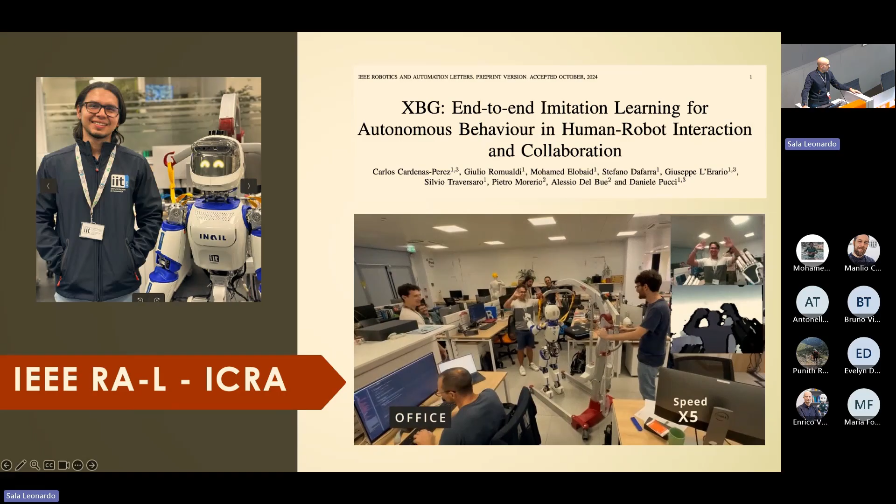So an update on publications. So I usually do this because what happens usually is that we know very well the literature on the other side of the world published by another university in, I don't know, Cuba, and we don't know what is going on behind the corner. So the paper by Carlos has been also accepted to ICRA. Carlos, I saw him around. Yeah. So congratulations, Carlos. Really nice results. So not only the Robotics and Automation Letters, which is a journal, the paper was also accepted to ICRA.

Then we got another acceptance to ICRA, which is Saverio, and I don't know where Saverio is. Yeah, Saverio is there. So Saverio, congratulations. It's been the output of the master thesis and a long work. Well done, Saverio. And then there is another update: the paper by Mohamed on online nonlinear MPC with stability guarantees has been accepted to RAL, so Robotics and Automation Letters.

This also was a really nice result, and it was really nice to see how the algorithms could work not only on the ErgoCub, but also on the quadrupeds by the DLS research unit led by Claudio Semini, in a tight collaboration with Giulio Turrisi, that I also wanted to thank, and that's basically the outcome of the paper. So congratulations, Mohamed and Giulio, for these really nice collaborations that I really encourage.

So I really encourage bottom-up collaborations across research lines, research units. Do not hesitate to stop other guys and understand what they're doing. So if there is any space for collaborations, historically we've always been open, and we will keep being like that. So a few messages.

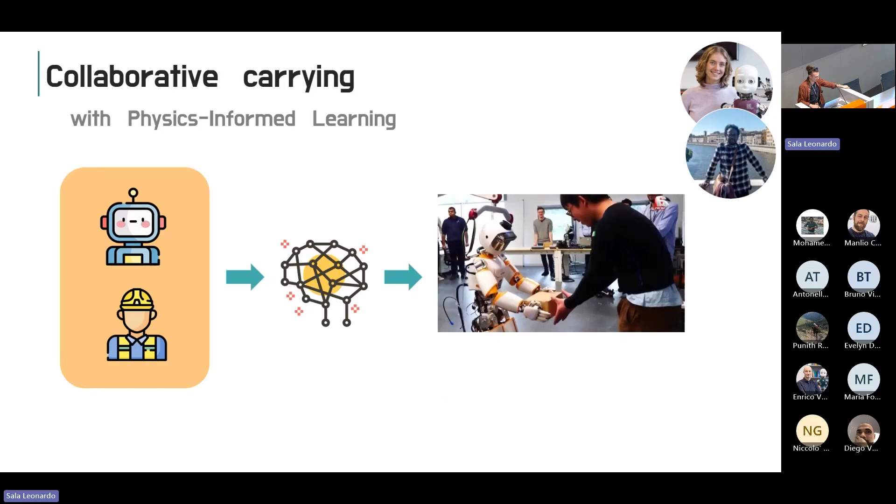Also going to a different behavioral synthesis approach, we have the work that Carlos has done, that is XBG, end-to-end imitation learning for autonomous behavior in human-robot interaction. This paper has been accepted. So the idea was to substitute the LSTM as a temporal component with a transformer encoder, a transformer network. So the idea is to let the transformer capture sequences and correlations that are also far in time. This work has been carried out with the guys from Pavis, and we already have some results.

Okay, so this is a preliminary deploy of the network. So yeah, this is an ongoing activity. XBG needs to be increased. So we have two streamlines, let's say. In one case is to make the architecture robust, and we can do this with more structured data, so feeding to the network the skeleton and the end effector pose. This is a work that Ariana is doing with Carlos, and also extended robot behaviors. This is another activity that just took off, that is to use cross-embodiment, for example via vision-language models, and to get data from the internet, so adapt them to the iRonCub model.

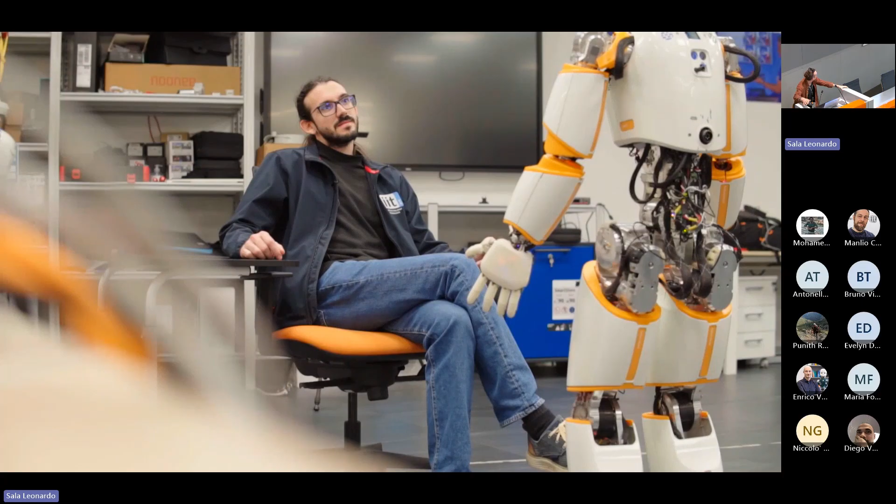So when you talk with it, we can see from here, for example, we have this nice video that is recorded. John is talking with the robot. The speech is translated and then passed through the LLM, and the LLM is able to generate the favorite action, let's say, and also some visual response. So in this case, we enable more channels, more than the motion one, we can enable also the speaking one, let's say.

Okay. We switch to some different topic. This is the data-driven method for design, so we can say co-design. This is exactly what Filippo has done. So the idea is to learn how to accomplish a task and evolve the model accordingly. So we can add to the classical reinforcement learning loop, in which we have an action, the reward, and so on, another external loop in which there is another optimizer. So we have the model that is fed to the simulator and evolves according to the task. For doing this, what we need is a fast simulator, and if it is differentiable, it's even better, so we can use optimizers to get the parameters. But this is the topic of the presentation that Carlotta will have later. So stay tuned.

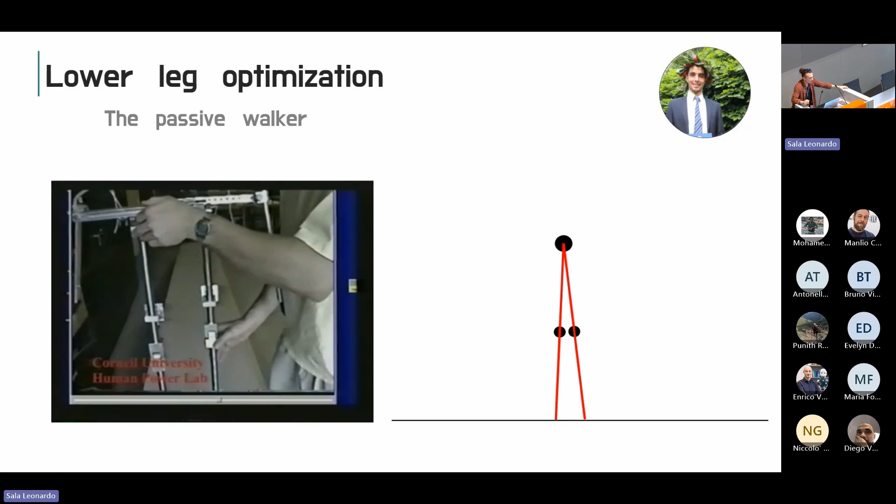Punith is addressing this problem, but with a slightly different approach. So he's starting from the CAD. So the idea is to use directly some software that generates models and takes into account structural analysis, and generates then models, for example, the URDF, to pass them to a simulator. So the classical co-design loop.

In the previous work that Punith has done, he optimized the interfaces with the jets, so the structure that holds the jets. And now he is extending the optimization to other pieces, in particular to the interfaces with the external forces, so jets and contacts, so also feet. And he also wants to optimize height and weight of the robot, for example, moving the central mass, moving the masses inside the limbs.

How to do that? He's using two main tools. The assembly parametrization and the structural analysis is done using SolidWorks and Creo, while the topology optimization, so also the modification of the structure of the link, not only the inertia and the mass, is done using Rhino and Grasshopper.

How can we do the task evaluation? We came up with this idea. Since the main idea is to also optimize the robot for multimodal tasks, so aerial and legged locomotion, we can feed and evaluate the model in a reinforcement learning loop in which the robot can walk and fly. So we can optimize for two main objectives.

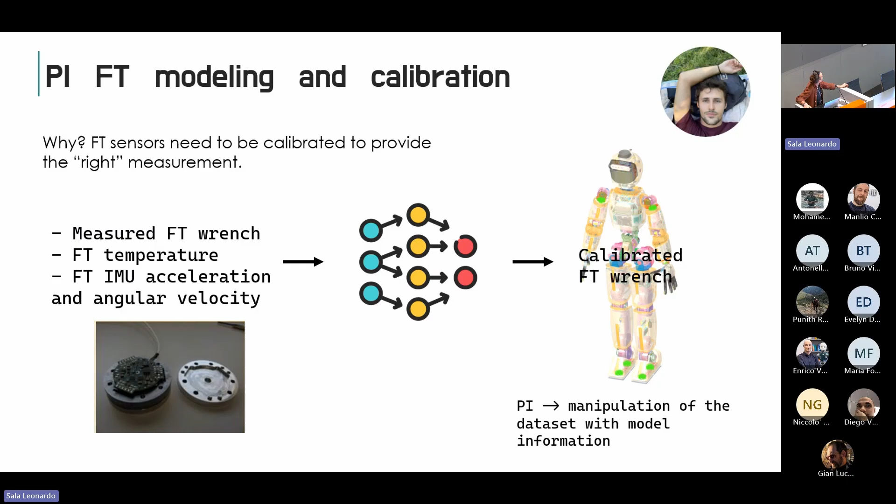Regarding models, we have also the work that Filippo is doing on FT modeling and calibration. Why do we need calibration for FT sensors? The raw measurement of FT somehow needs to be transformed, so we need the right measurements. The idea is to take measured FT readings that are not correct, along with FT temperature and FT acceleration, feed them to a model and obtain the calibration. The physics-informed information is in the use of the model.

There are some results that are pretty promising. In this video, you can see that Phil is compensating, somehow the controller compensates for the motion. With no second calibration, the movement is not really good, there is some damping. While with the second calibration, we can see that the movement keeps the energy.

But then also a monster came out, so we have the temperature effect. We see Danny with a strange tool heating up the robot. And from the data, what Filippo discovered is that we have hysteresis.

On the left, we can see that with no second calibration, these are the raw data, we have hysteresis. Feeding the temperature into the model, doing a training with the model, this hysteresis is mitigated, let's say. Along with this, Phil is also investigating the use of LSTM.

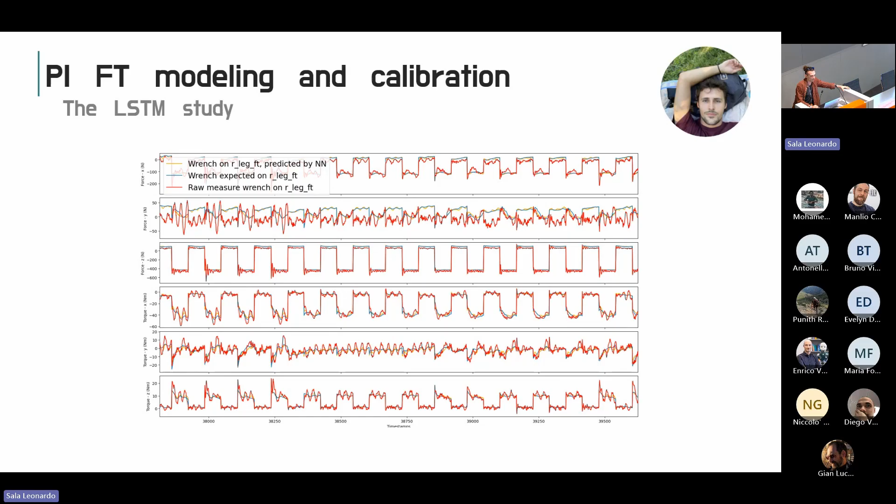The LSTM should capture some possible dynamic effect in the FT. Before it was instantaneous; right now with the LSTM, we can give some dynamics. Filippo also found out that there is a slight improvement with respect to the multi-layer perceptron.

We arrived almost at the end. There is now the reinforcement learning, there is MPC for iRonCub. You may wonder if this is connected to learning - no, but Davide will soon start to work on topics related to reinforcement learning, and there will be a presentation later. And finally, this is the work that Giulio and I are doing.

This is reinforcement learning with adversarial motion priors. The idea is to exploit imitation learning, take some motions from motion capture of humans walking, scale them to the robot, and create a reward that forces the policy to follow these robot movements.

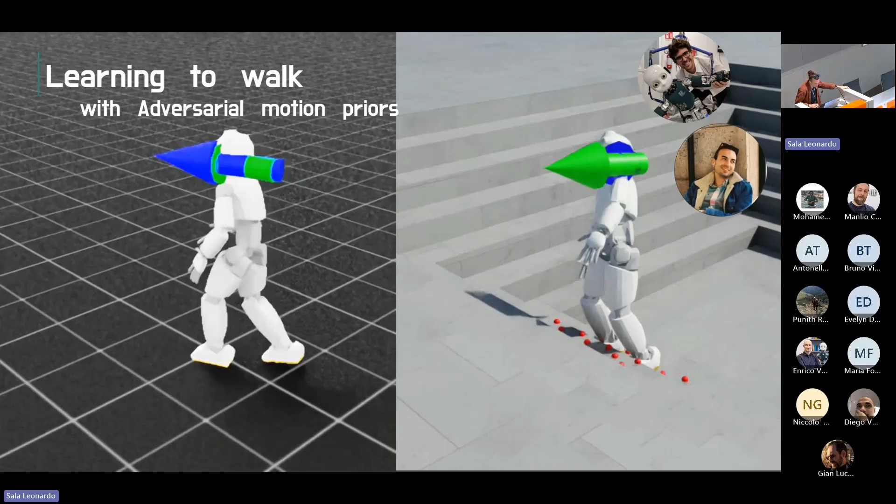The simulations are okay, and we need to move to the real robot. So what is needed? We have joints with friction, so we need a policy that exploits the friction during training. For this we also use heavy domain randomization, and maybe more - randomizing things like the terrain, and maybe more information in the observations we give to the policy.

But we did some first experiments, and it does something. This is the fancy video. We have also another video that I prefer because it's funnier. As Giulio said, we might have broken some FTs.

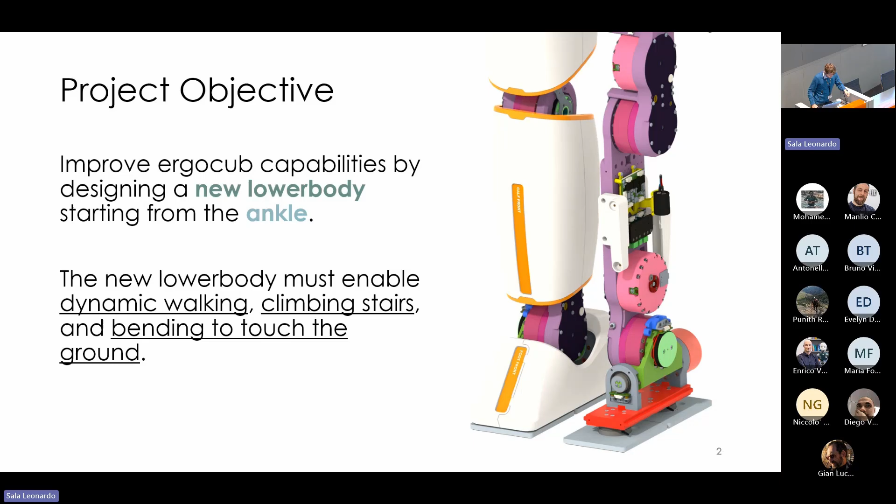After some iteration, what we would like to do is achieve a behavior like this. So for sure we need to improve the hardware and then also the control.

In order to do this, what we started doing 3 months ago was to create a new team that groups some AMI members and iCub Tech members, combining research and the expertise of iCub Tech.

We started 3 months ago and did a bit of planning. We prepared 6 milestones and managed to complete 4 out of 6. But before going through all of these, let's just have a quick recap.

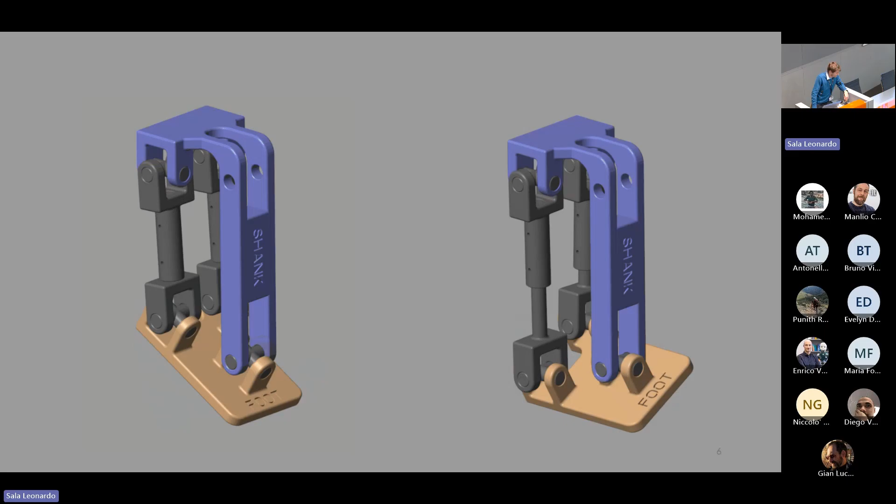We want to design a new ankle mechanism, and we decided to create a mechanism with a closed kinematic chain and linear actuators. We have these 2 linear actuators: when they move simultaneously, we actuate the pitch, while when they move in opposite directions, we control the roll.

Now let's move to the milestones. The first one was to create a digital thread in order to implement a model-based systems engineering pipeline that will allow us to track how the process evolves in this approach. The first thing to do in order to implement this pipeline is to identify the requirements.

To identify the requirements, we spoke with the stakeholders and defined some tasks we would like to do with this robot. We performed simulation and experiments with the real robot to identify the joint requirements. With these, we developed a mathematical model of the mechanism, which allowed us to convert the joint requirements into actuator requirements. These requirements are fundamental for choosing and designing an actuator, and we used them to create the model engineering and digital thread to track the system requirements, integrating them in the MATLAB environment. This is the milestone we completed.

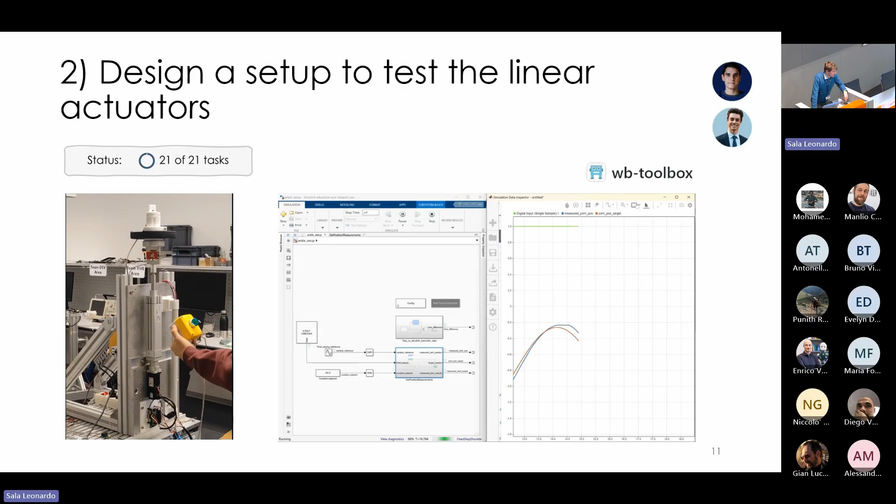Another task was to identify the main components to create the first ankle mechanism. Given the constraints we found before, we started a literature review, and after a lot of meetings with suppliers, we identified the Wittenstein actuator, which we are going to use to create the first mechanism.

Basically it's a linear actuator with brushless motors connected to ball screws that convert rotation into linear motion. This actuator already integrates an incremental encoder, and we chose to use it because this way we can control it without changing too much of the firmware. At the same time, these actuators enable us to satisfy most of our requirements, except for the most dynamical ones, like jumping and fast walking.

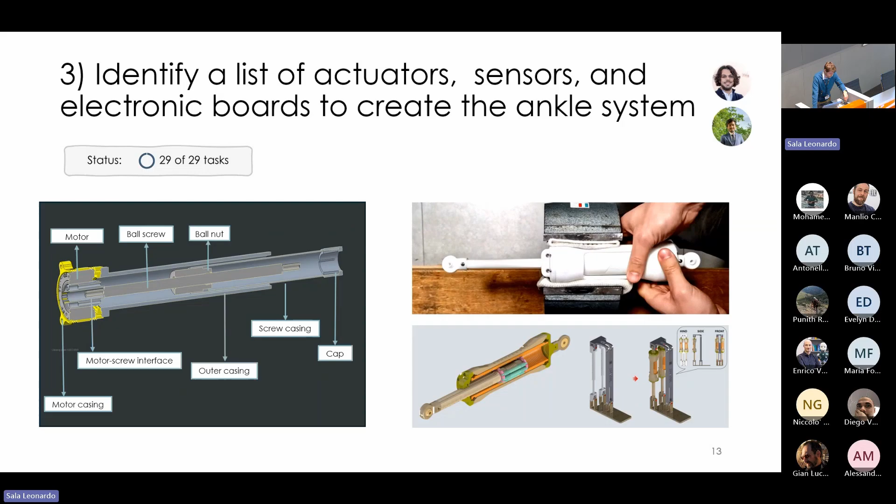So we started investigating the possibility of designing a custom actuator with ball screws, but also with roller inverted screws. At the same time, we began another investigation evaluating the possibility of creating a mechanism with a different kinematic structure, maybe without linear actuators. For example, the mechanism you see in the video is from the Unitree robot, which has a revolute motor, and here we're also evaluating creating a custom actuator with a planetary reducer.

Another activity was creating a simulation of the low-level controller to track the desired joint position. We wanted a control law that lets us track the foot orientation while controlling the actuator. So we created a SimScape model of the ankle, ported it into the System Composer pipeline, and verified that the simulation results are comparable with the mathematical model we developed before. And yes, they are.

And so the next step in order to conclude this activity is to design this controller. Then another activity that we did was to perform a simulation of ergoCub walking with the new ankle.

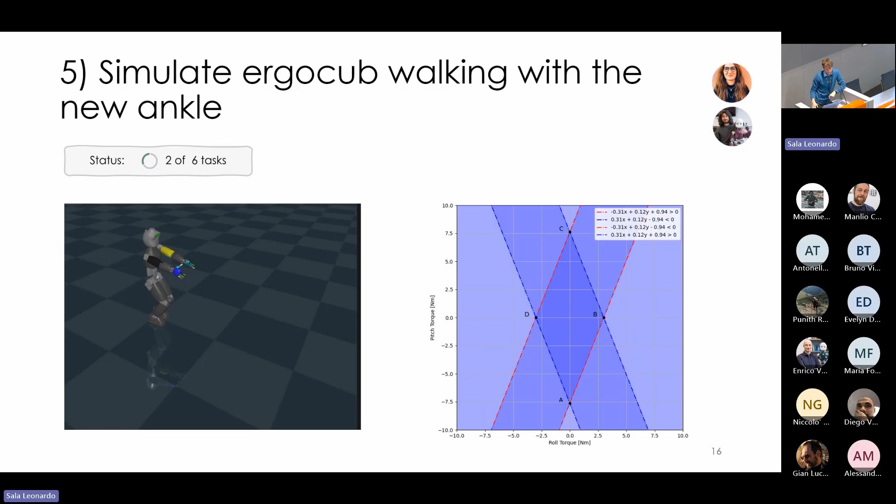And then at the same time, in order to simulate and test the new ankle, what Roberto did was to understand how the force limits of the actuator translate into torque limits, and now what we wanted to do is integrate this relationship into the constraints such that the controller can provide a force that satisfies the requirements, the limits.

Then the last milestone that we set was to create a framework in order to optimize the linkage parameters and the actuator selection here. So the goal was to understand which is the best mechanism in order to perform the task that we have identified before.

So basically we parameterized the mechanism, and then we formulated an optimization problem with Grasshopper and Tunny, and the outcome is a Pareto front where in our case the objectives were to minimize the force and the velocity, which are two opposite objectives. Now what we are doing is identifying which is the best mechanism for our use case.

But then, since we started to investigate also the revolute motor, we ported the same framework to the revolute, and in this case we are also investigating the possibility of considering collisions between motors. As you can see in the figure, all the solutions with red points are not feasible.

Okay, this concludes the milestone. Let's quickly go to statistics.

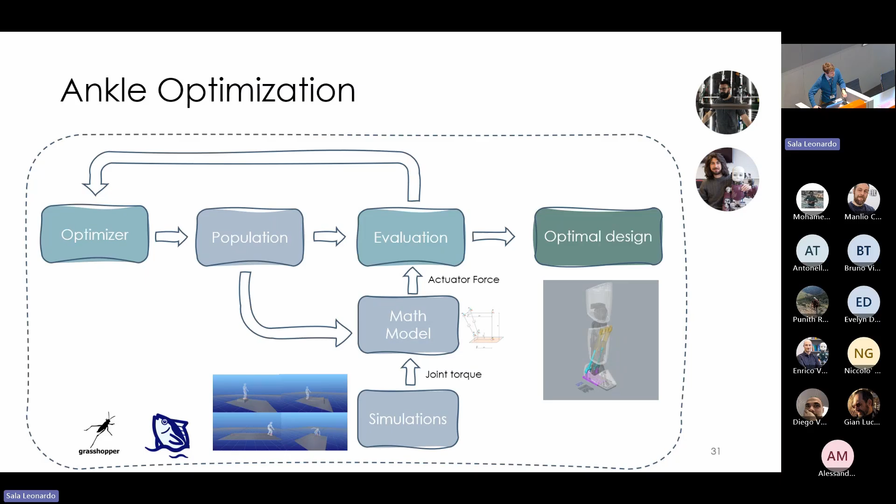Here, the thing is that we are assuming the design is not influencing the simulation, but is just influencing the conversion between torque and force. This is different from the approach that Punith is doing, because in his case the population is influencing the simulation and also the controller, so the pipeline is a bit different.

While another approach that Shabarish is doing is basically here there is not an optimizer, there is Shabarish, the mechanical engineer, who is defining the population, also because here the design space was smaller. And so he created the population.

Then with simulation, we evaluated some possible solutions in order to understand which motions are fundamental to create thrust vectoring, and then we obtained the final design. And then a different approach has been used for a different problem by Guglielmo.

Basically here we wanted to understand which was the correct mathematical model of the inverted roller screw. So what we did was start manufacturing stuff, and we did some physical testing.

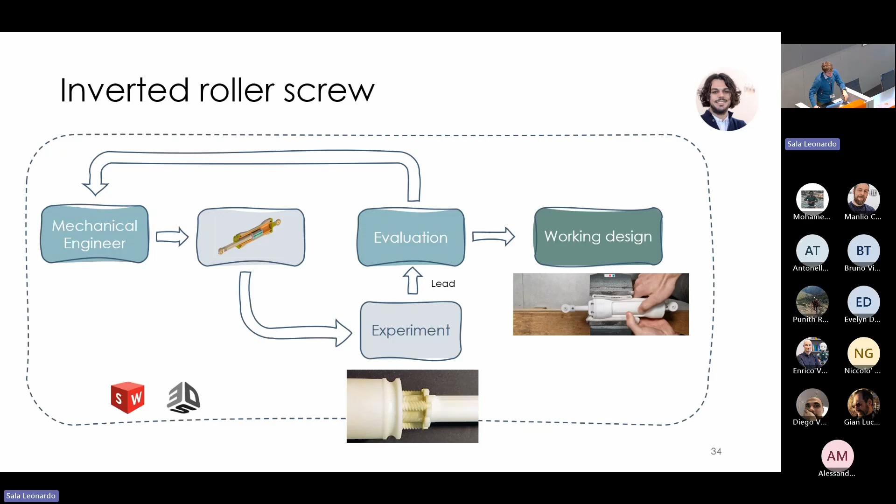Then with physical testing and a lot of analysis of YouTube videos, we understood that there were some problems, and then with some iteration we managed to obtain a final working design.

And then just one word about other activities we are doing in this team, which are basically what Giuseppe also said before. We are also studying simulation, and these are the fundamental data in order to create this pipeline that we have seen before. And that's all.

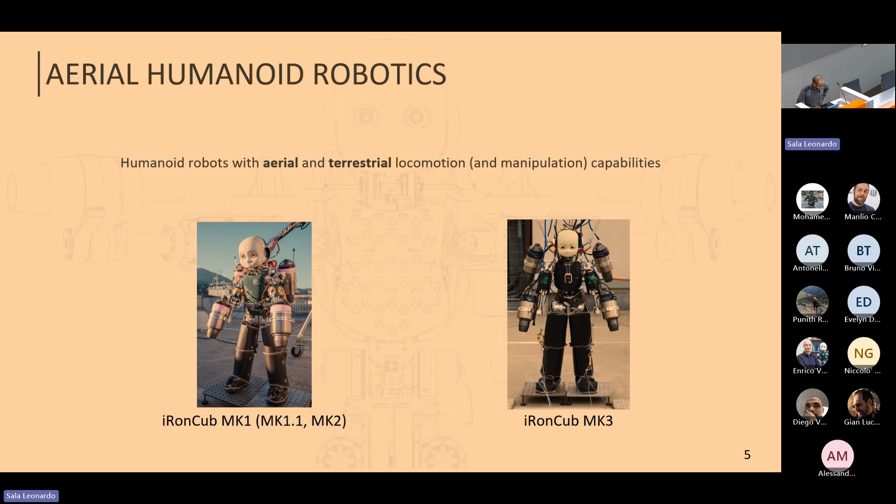The questions we are trying to solve in the iRonCub project are how a humanoid robot can benefit from multimodal locomotion, and what design and control challenges we face when we equip a humanoid robot with jet engines for multimodal locomotion.

The developers team currently consists of 10 members. Antonello went for a period abroad at Stanford. And I'd like to give a special thanks to Gabri, because he has been around for many, many years, leading the iRonCub team and giving us tremendous support. So thank you very much, Gabri, for being an amazing Scrum Master.

No, yes, thank you. It's not like goodbye.

Yeah, so the team activities are ranging from experimentation with the robot, with the jet engines, and trying to find models and simulation. And then it ranges from aerodynamics, hardware design and co-design, and also planning and control.

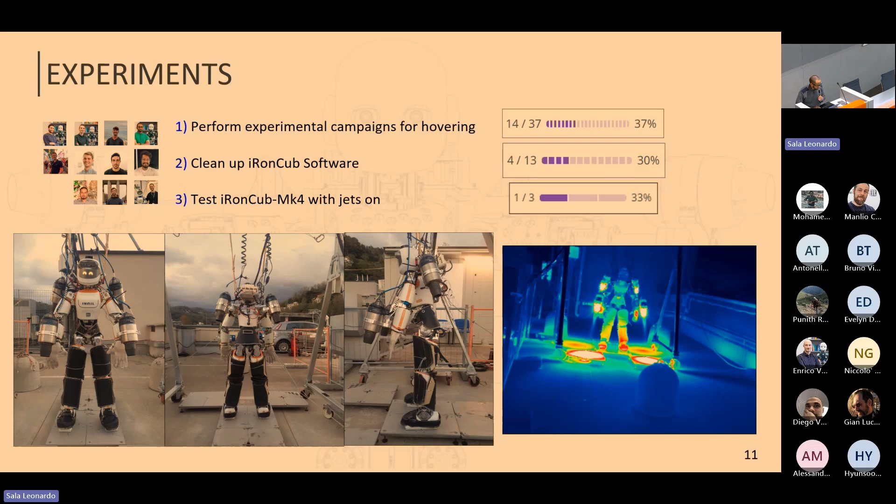Our experiments: in this iteration, we have conducted 7 iRonCub experiments given the time and weather constraints, and also 2 test bench experiments.

Then let's talk about the base and jet estimation activity. Mainly we are focusing on the jet engine models for estimating the thrust, as we found that it requires some attention because the thrust usually depends on the weather conditions. So if we perform an experiment in the summer and in the winter, we get different responses. So we had to have another iteration on the models.

The base estimation algorithm is a task that is taken over by Alessandro. And for the improvement, we wanted to have some ground truth. That's why we started working on using the setup that we have in the lab for giving the actual position to compare with our setup. The force torque sensor activities are more or less on hold this iteration because we are focusing mainly on the jet engine models.

There is another interesting activity by Alessandro, that is, we were trying to reduce the sim-to-real gap. So Alessandro was injecting the noise that we have on the sensors into the simulation, and then Davide was testing with the controller. So in this way, we are closer to the real scenario, and we are identifying behavior closer to the real robot.

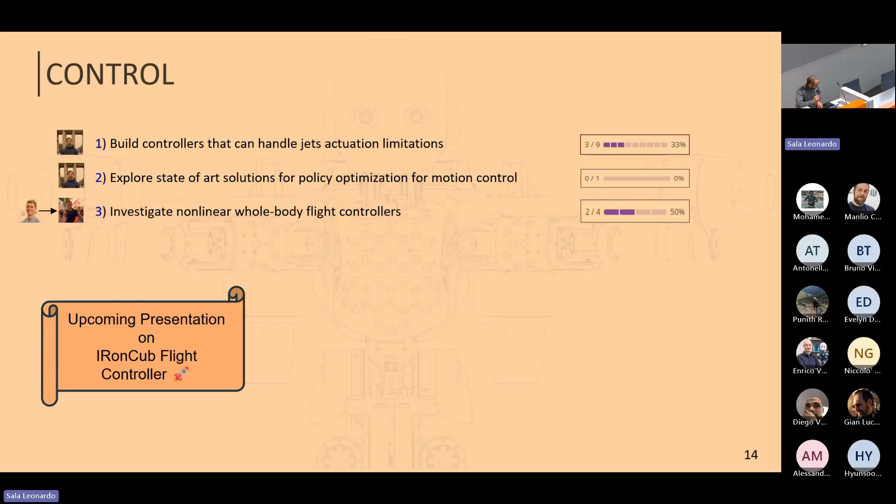About the control, Davide is conducting his PhD, and he is basically coming up with a new control architecture that he's going to present in the next presentation. So stay tuned. Okay, I'll try to be fast.

Then there is Niccolò, who is conducting the nonlinear control activity that has been taken over after Fabio Bergonti was working on it. And he managed to build the Python bindings for testing in Python. I'll try to be fast. Saverio's activity was mentioned before for his master thesis work. At the moment, he's involved with the joint lab, so he rarely has time to work with us.

Hardware design is the activity of Shabarish. Thank you Fabio for highlighting it. Basically, he's working on the thrust vectoring, and he came up with a conceptual design. So we are moving towards realizing this design on the real robot, and he's preparing also a publication for the thrust vectoring activity.

The activity of Punith, thank you Giuseppe for highlighting it. It's really nice that everyone explained the work before. So Punith, as Giuseppe was saying, is expanding the parameterization that he did in the past for the whole robot. So he's considering more joints.

And another activity that I wanted to highlight is that he has been working with the MuJoCo simulator. He ported the iRonCub controller into MuJoCo to be able to test his pipeline, but for now his focus is back on the reinforcement learning environment that Giuseppe developed, because it would give more promising results.

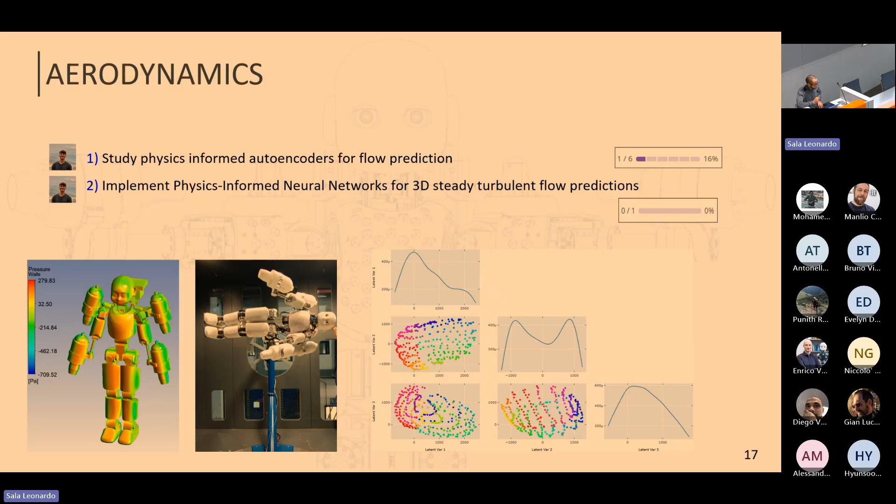The activity of Anto, thank you Giuseppe for explaining it before. You made my job very easy. Basically, he's exploring more physics-informed neural network models for his aerodynamic modeling.

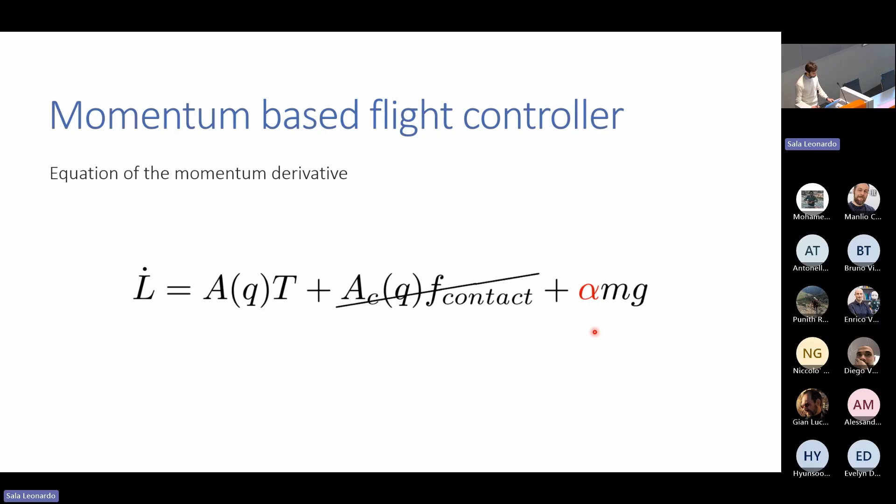So at the end, the equation rewrites like this. We write it in body because in doing that, the A matrix depends only on the joint position. But here the problem is that this equation is nonlinear in joint position and thrust, as you can see. So what we decided to do is take this term and linearize it around the current joint position and thrust.

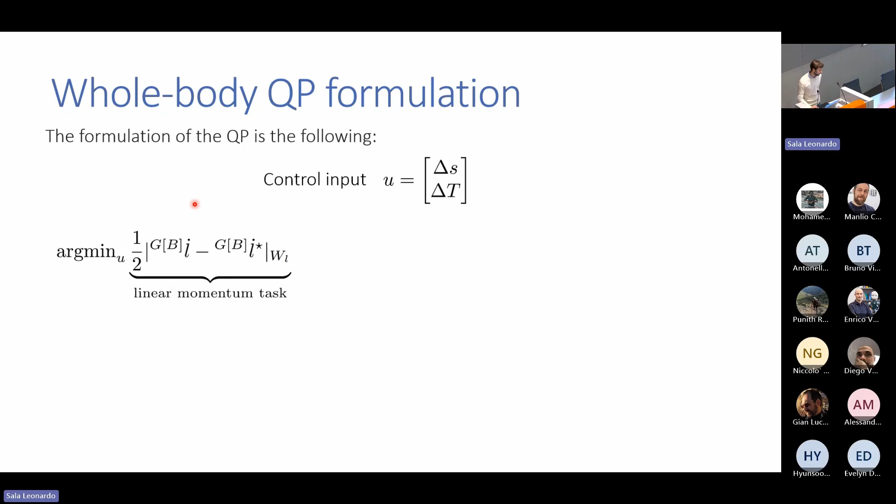So the first controller that we came up with is an instantaneous whole-body controller that runs at 1 kHz and computes the desired thrust and the desired joint position. This is the formulation of the QP, so we chose as control input the variation of joint position and thrust. And then in the cost function, we have the linear momentum task, which basically is needed for controlling the position of the robot. The angular momentum task, which is needed for the orientation of the robot.

And then we have a postural task to keep the control input as low as possible. And then this is subject to the following constraints on the maximum variation of joint position and thrust, and maximum and minimum thrust and joint position.

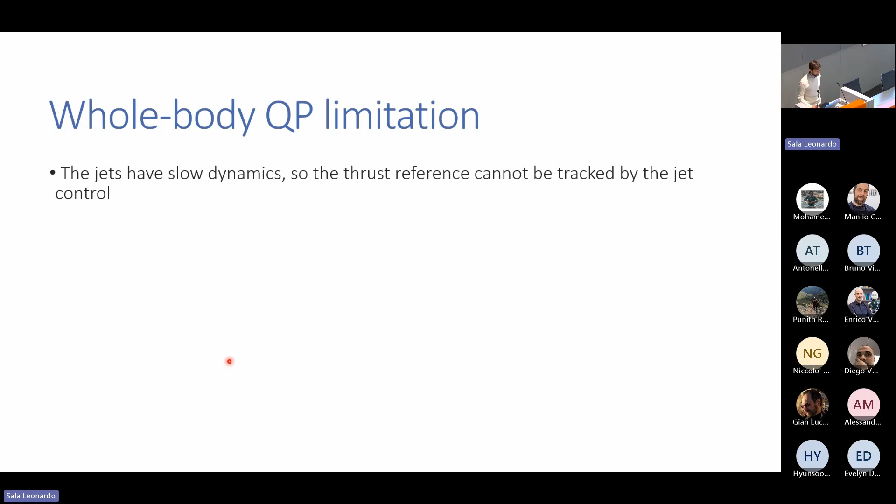This linear MPC runs at 10 Hz because it's the same frequency the jets run at. If we ran faster, all the throttle commands would be lost and not actuated. The main peculiarity of this MPC is that it computes directly a throttle reference for the jet, and not a thrust reference. The MPC also gives a joint position reference for the instantaneous controller, which in this case computes only the joint positions to be set to the robot.

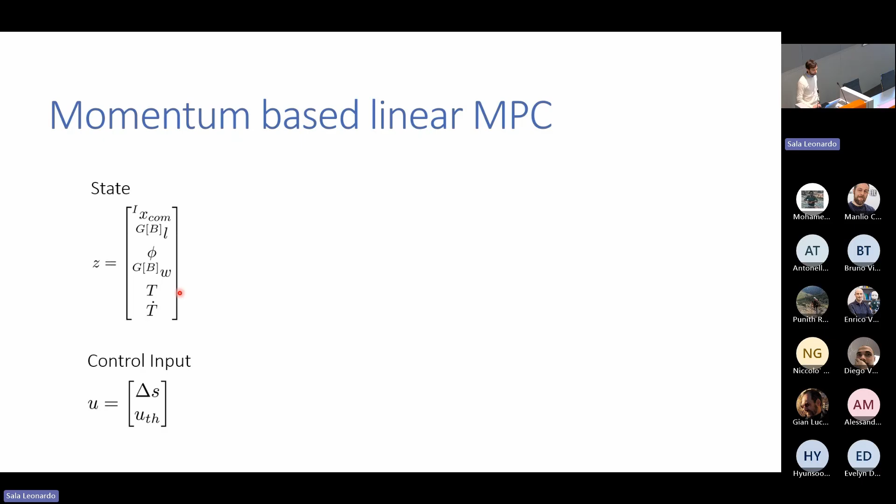So here is how we decided to implement the MPC. In the state, we have the position of the center of mass, the linear momentum, the roll pitch yaw of the base, the angular momentum, thrust and thrust derivative, while our control inputs are the variation of joint position and throttle. And as you can see now, the thrust became a state and no longer a control input.

And here is how we selected the cost of this MPC. First we have the cost related to the tracking of the reference state. Then we also have a postural task to keep the control input as low as possible. As constraints, we have the usual propagation of the dynamics of the states, and some constraints on the control input.

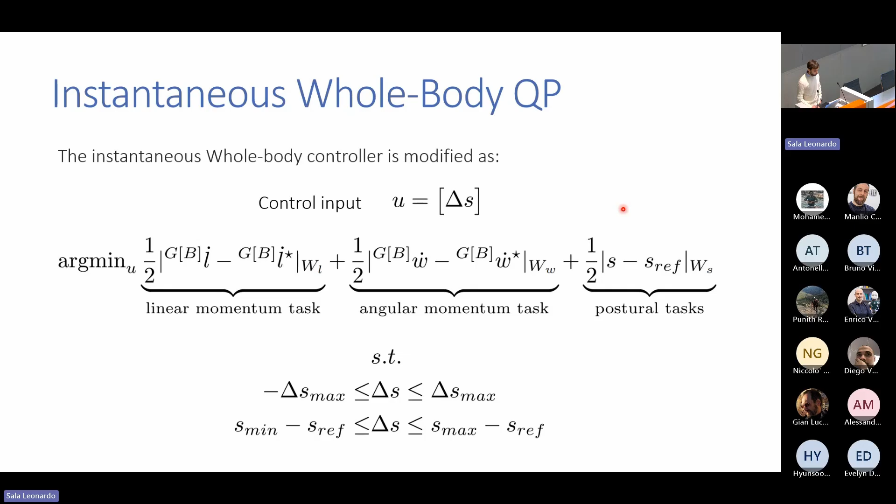3 minutes left. Sorry. What?

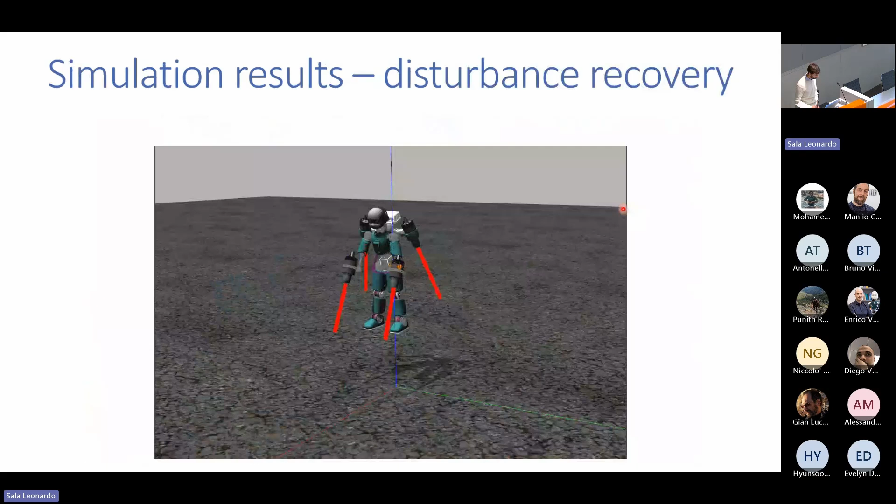The current limitation we found is basically the sim to real gap. We can sum up the limitations in this one, but in detail, the jet model that the MPC uses strongly depends on the air conditions, and this is not very easy to model. Then in the MPC, the state of the thrust and thrust derivative is not updated with the estimated thrust, but with the prediction of the MPC at the previous time step.

And then we found out that there are some delays in the communication with the turbine. When we actuate the throttle, it takes almost half a second to be properly set in the jets. We are working on future improvements. The first one is to improve the simulation and maybe add some disturbance in the jet forces in Gazebo.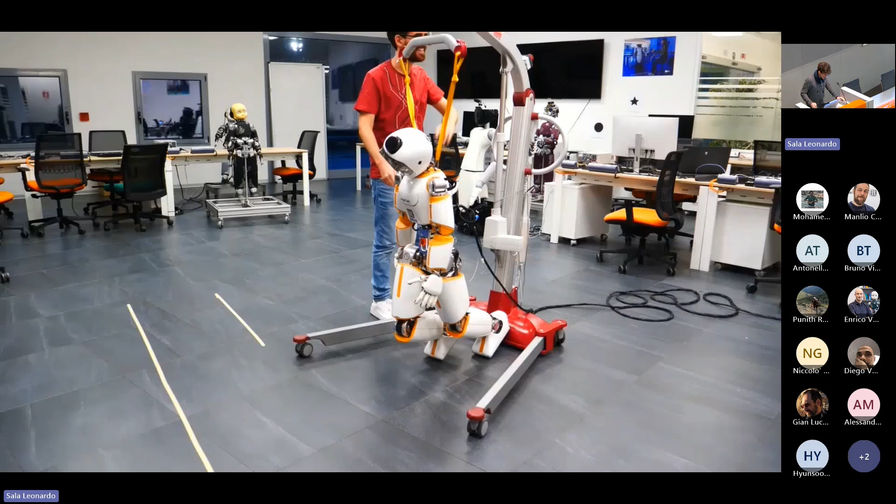And so to solve this problem, we have the wearables, for which the iFeel and the human team are the main responsible, and then the robot that we already have, the ErgoCub robot, for which the Delta team is the main responsible. So where we are now, we have the classical view that I show you. I had some other clips where we have the robot walking, and it's not so robust, even if we are able to show some demos here and there. So this is actually where we are today.

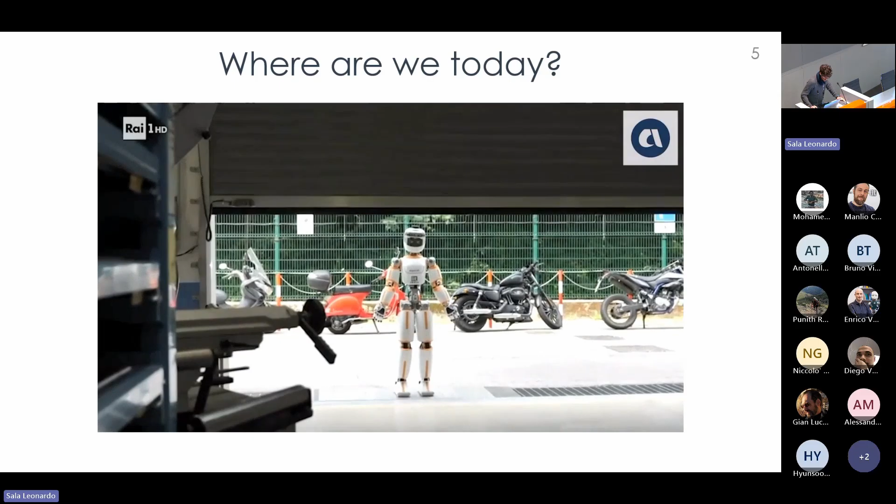So today we have a robot that is able to walk in position control, and this is actually a limitation of our control infrastructure. The fact that it's in position control makes complex the interaction with the environment and the humans, for instance. So our goal, our moonshot, is having something like this. Fabio already showed this video. This is the Unitree robot.

So you may think, okay, but this robot is completely different from ErgoCub. ErgoCub is taller, and the weight of this robot is less. That's true. But in the meantime, there is also the Tesla Optimus robot that is similar to ours for the size and for the weight, but is able to do crazy stuff, at least for us, like walking on uneven and rough terrains and able to recover. So our goal is to have something like this.

So the Delta team mission is to design a robust, reactive, and dynamic architecture for locomotion and human-robot interaction. This is the classical slide that I copy from one research increment to the other. We have several actors. Some of them are in other teams, some are mainly working on the team: Giovanni, Roberto, Evelyn, Carlos, Lorenzo, Mohamed, Ines, Filippo, Guglielmo, and me.

So let's go to the team objectives. We have several team objectives. The first one was to have a momentum-based balancing controller up and running on ErgoCub, working with the UKF and the friction compensation that Ines developed during her PhD. This objective has been completed, and this is the video.

This is one of the videos that Ines will present at her PhD defense, where we have two ErgoCubs working with the same controller, and the low level is different from the one we used to have, that is the whole-body dynamics, but is a UKF filter that considers also the current measurement.

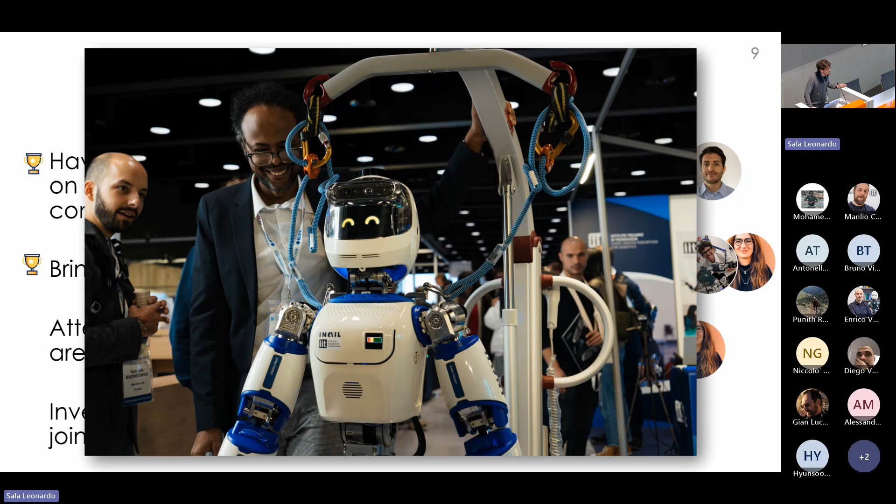There was another task to make the robot walk where the joints are controlling velocity. This activity is slowly starting, a collaboration between tech and us with Carlotta and me, where we moved our analysis from the robot to the test bench they have, since we found some modifications that had to be done in the firmware. So testing it on the test bench was easier.

Another important task was to investigate possible solutions for modeling motors plus gearbox. This is a step towards having better torque control. This activity is ongoing, and with the help of Giuseppe and Fabio, we decided on a list of possible experiments we can do with that, hopefully once the test bench arrives at a certain point.

Okay, then there were some more personal objectives. For the low level, Ines was able to implement UKF for floating base on ErgoCub. I'm not going to show the video again since I showed it before.

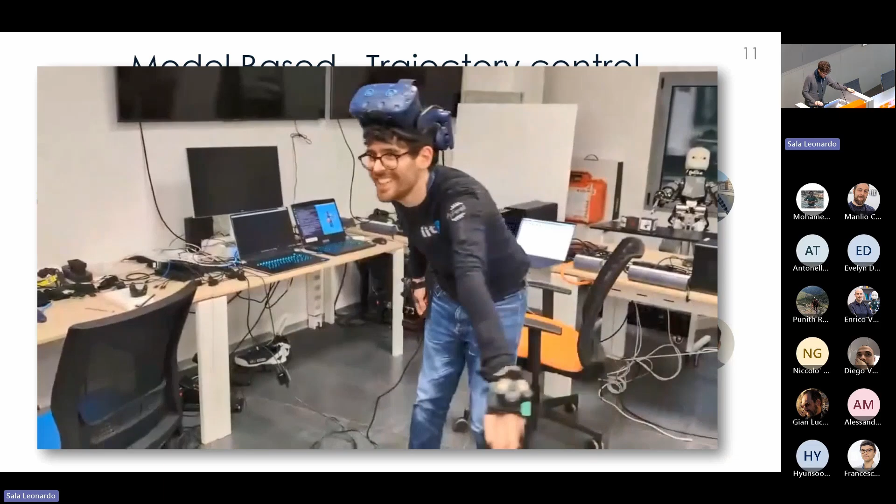Tranquillo. So there is the video where I'm trying to collect some data to analyze the reachability space of the current ErgoCub. There are for sure more proper ways to analyze the reachability space, but this one was the fastest in order to give fast results to the iCub tech team.

And then there was the work of Lorenzo. I won't talk a lot about this because Lorenzo will do the vertical presentation after me, but he was able to port the momentum base. That is actually the video that I showed you before.

So for the high-level controller, Lorenzo was mainly in charge of the task, while for the connection, low-level, and identification, it was Ines.

Okay, regarding data-driven approaches, there was reinforcement learning. The task was trying to port MPRL onto ErgoCub. We did some experiments on the robot.

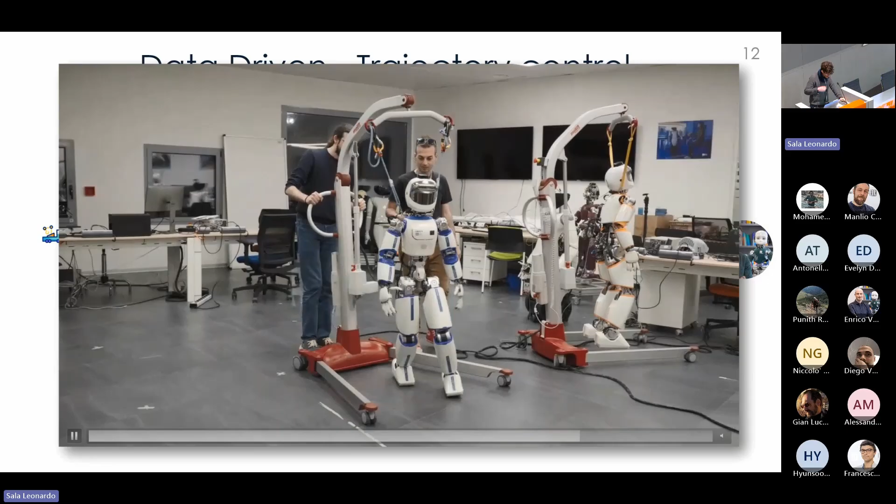It's not working fine, as you can see, but at least it's not exploding. At the beginning, the first experiments we did, the robot wasn't able to do anything. We were starting the policy, and the robot was doing crazy motions. Then, fixing bugs here and there and adding some randomization, we were able to obtain this. Still, there is a lot of stuff we have to do.

Okay, then trajectory generation. Evelyn was working on implementing the first prototype of a data-driven approach for collaborative carrying. On the right you can see one of the data collection campaigns, where there was Evelyn and Mohamed. One of the two was the human and the other was the robot. This data will then be used in a neural network in some fashion.

This is similar to the work she did during the first year of her PhD. The idea is to automatically generate trajectories that will make the robot follow the human while moving an object. Then she paused this activity because she left for Manchester.

So she was able to perform a literature review for the project, and she will work on the Koopman operator for linearizing nonlinear systems and improving theory, control, and planning. She started from toy problems because the topic was a bit far from what she was doing before, starting with a classical damper spring mass system.

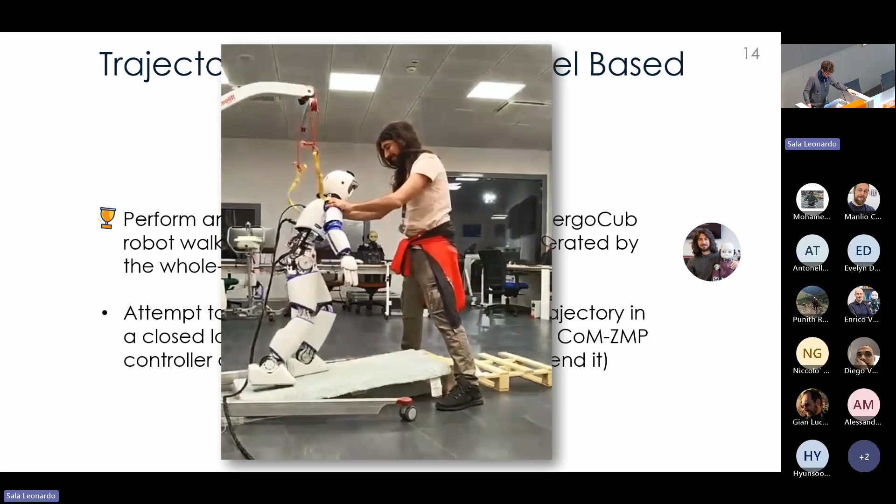Regarding the trajectory generation on the model base, Roberto was able to perform and complete the experiment campaign on the ErgoCub that allows the robot to walk on the inclined plane. In this experiment, Roberto just played the joint trajectory that the trajectory optimization generated. So at least this campaign concluded.

And then the idea was trying to consider this whole body trajectory generated in a closed loop fashion, but this has been stopped for the time being.

There was another task that is switched from ZenHub to GitHub project. It has been done, as you will see later on the plots.

Regarding the dissemination, Ines submitted her PhD thesis, and she also submitted a paper, a RAL paper on the UKF and friction compensation. This is actually the submission.

Actually, I didn't put it here, but also the paper of Mohamed has been accepted to RAL. But Daniele already mentioned this.

Then regarding Roberto and Evelyn, the plan was to resubmit for Roberto the RAL paper, but this has been delayed for the time being, and he will focus on this in the next research increment starting from tomorrow. And the same for Evelyn, because she worked on other tasks, and in the end we decided to revise and resubmit the PI DRM paper in IROS that will be in these 3 months.

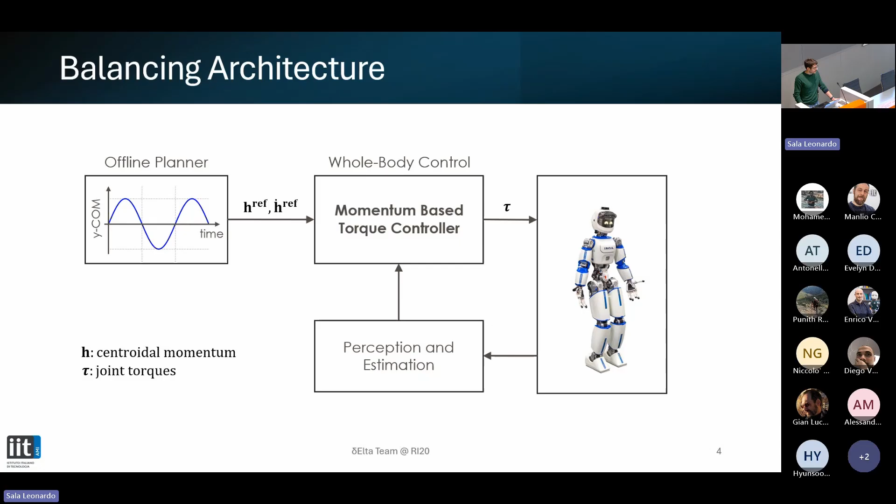And this is exactly the control architecture. We have this momentum-based torque controller that is sending the joint torques to the low level. And if we are talking about a balancing action, we have a simple offline planner that is providing a sinusoidal trajectory for the center of mass position, for example, in the y direction.

And you can get this torque control because the robot is not stiff. It is pretty compliant, Ines can interact with it. And given also the energy Ines is using when shaking the robot, this means that the whole control architecture, both high level and low level, is pretty robust to external disturbance.

So at this point, we thought, how can we extend this control architecture to walking? The first pretty simple idea was: okay, we do have a pretty good whole body position control pipeline for walking, why can't we recycle some of the ingredients of this architecture? Among these ingredients, you might recognize the unicycle planner, the COM-ZMP controller, and the QP inverse kinematics.

And this is indeed what we have done. On the right-hand side of the control architecture, nothing changes, but now instead of the simple offline planner, we have a more advanced online planner that consists of the unicycle planner that plans the steps, the COM-ZMP controller, which stabilizes the COM trajectory, and the QP inverse kinematics that provides then the reference for

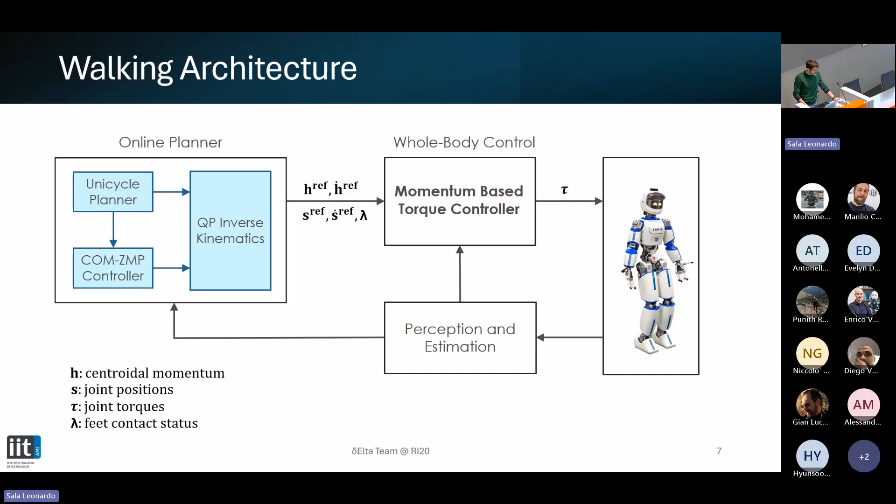As usual, we first test our controller in simulation to not break the robot, and this will happen. So the robot manages to walk, but it is kind of shaky and bumpy walking, with the swing foot not performing a smooth trajectory from one step to the following one.

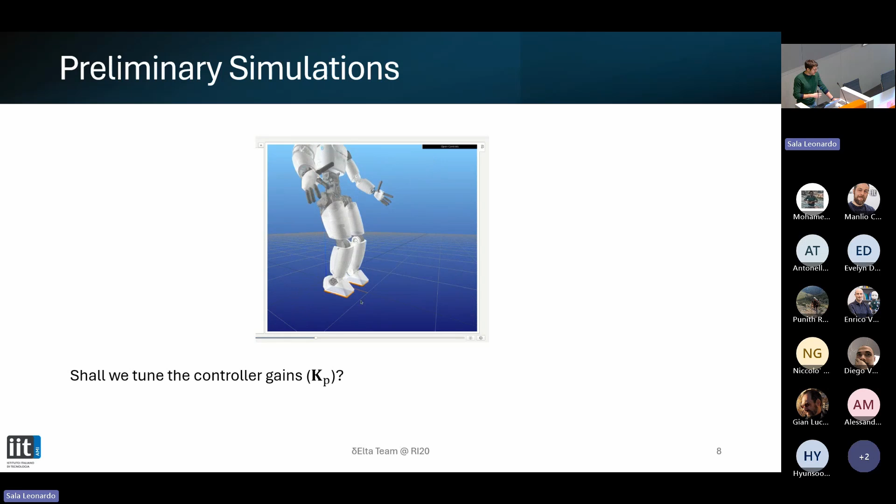And since we changed a lot about the planner, it can happen that with model-based control, you need to retune stuff. We were confident about the architecture, so we thought that this was a problem of retuning gains, but we didn't feel like doing it manually.

And for this reason, we leveraged the Python library called PyGAD, which implements a genetic algorithm. In our lab, we have a lot of experience with it, think for example of the work of Carlotta or Fabio.

Here there is nothing fancy, but what is interesting is that we didn't want to rewrite the software stack. We wanted to use the exact same software stack both in simulation and on the robot. So for this reason, within the step of calculating the fitness function, you might recognize that we are running the exact same commands we run in Gazebo or on the robot.

So the advantage of this pipeline is that the software stack in simulation and production is exactly the same. So the software being optimized is exactly the same that is going to be simulated or deployed on the robot. But there is no free lunch, so for sure there is a disadvantage. In our case, as far as we know, we cannot parallelize this process. So the tuning is a bit slow.

Nevertheless, we managed to get pretty good gains, and in fact now you see the simulation is a lot better. The walking seems pretty fine, and the swing foot is now performing a pretty smooth trajectory from one footstep to the following one. So since we were kind of happy with these results, we decided to go to the robot, and this is what we got.

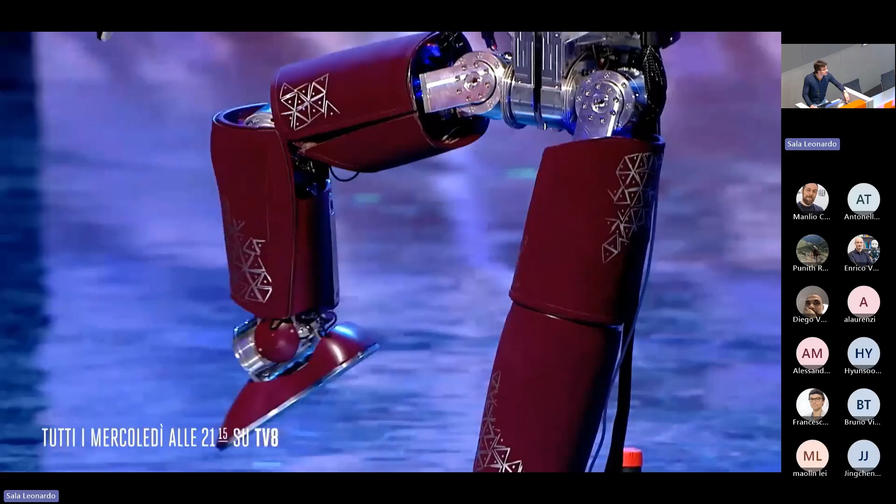Thanks a lot, Guglielmo. So I'll directly start with the goal of Team Delta. Team Delta has a goal to create new robotic demonstrations that highlight the capabilities of our humanoid robots. I showed this video also during the past research increment, but I thought to keep it. It is a sort of slideshow of the demos over basically 10 years, from basic interactions to the robot balancing on stage, and also balancing and walking during particular shows, like in that case a Dolce & Gabbana show.

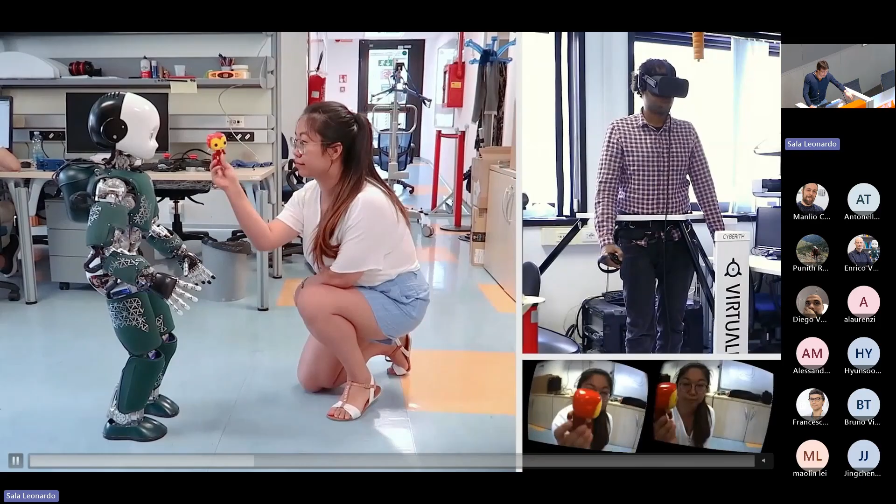We moved forward considering also the capability of recovering from pushes on the arms, and then teleoperation. Here is the work carried out by Mohamed in his first period in the lab. The teleoperation has been quite an experience for us, and a great investment of time that led us to having an avatar system that used the iCub3 robot for the XPRIZE competition, involving different types of capabilities.

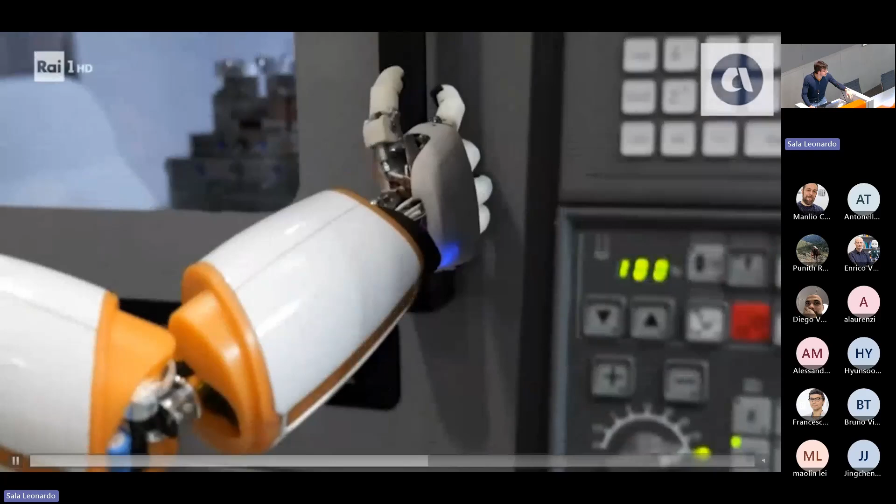Moving from iCub3, we arrived to ergoCub, where we managed to port basically most of the capabilities that we had on iCub3, from walking to teleoperation, with the aim of performing in more industrial settings, like here in a warehouse. And this is going to be fundamental also for the future research increments. Indeed, the manipulation capabilities need to be central in order to give added value to the robot.

Not only through the use of teleoperation, we managed also to take a step further, trying to remove the operator from the loop and having the robot autonomous. So the teleoperation data allowed us to train neural networks that are able to replicate the motion of the operator under the same circumstances, under the same type of inputs.

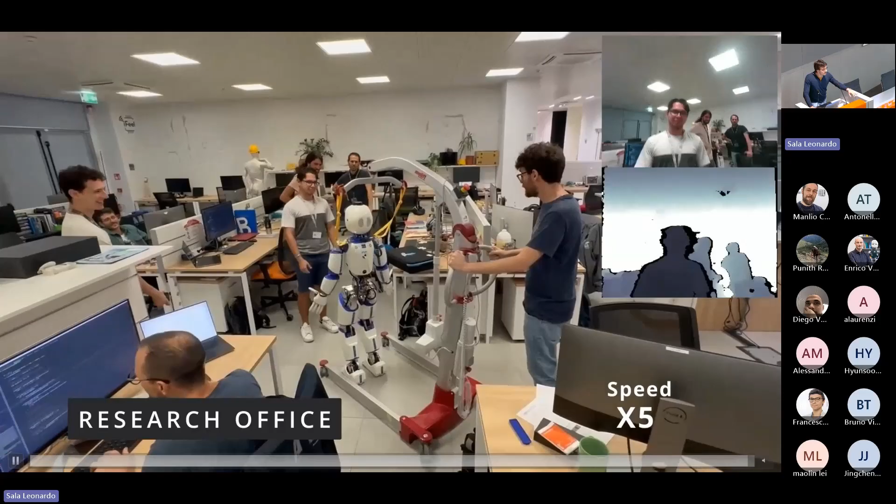And this is the work of Carlos here, with the robot walking autonomously in the lab and carrying objects when prompted to do so. So this is sort of the storyline of the past 10 years of demos that we had with the robot, cutting a bit of corners. So what's next? What we try to achieve now is to point the robot to an object, and the robot has to reach it and grasp it. As simple as that.

The people behind the team are the following here. In particular, I think that this research increment has been a bit of a transition, because at the beginning of the research increment, two people from PAVIS, in particular Matteo Tiezzi and Tommaso Apicella, joined the team full-time. They are completely part of the team activities, and I'm pretty happy with it. So I'm happy that we're also collaborating with other teams within IIT.

During the past research increment, we only had in the end one big demo, which was Humanoids in Nancy between 22 and 24 of November, where we brought in the end two iCubs plus ergoCub. So we had 3 robots there running. We had all sorts of issues, and it was definitely a complex task, but again, it was quite an experience, and we had the robot performing autonomously on stage in front of the Humanoids audience, which is made of our colleagues, and the results were still impressive. So I'm pretty happy about the result.

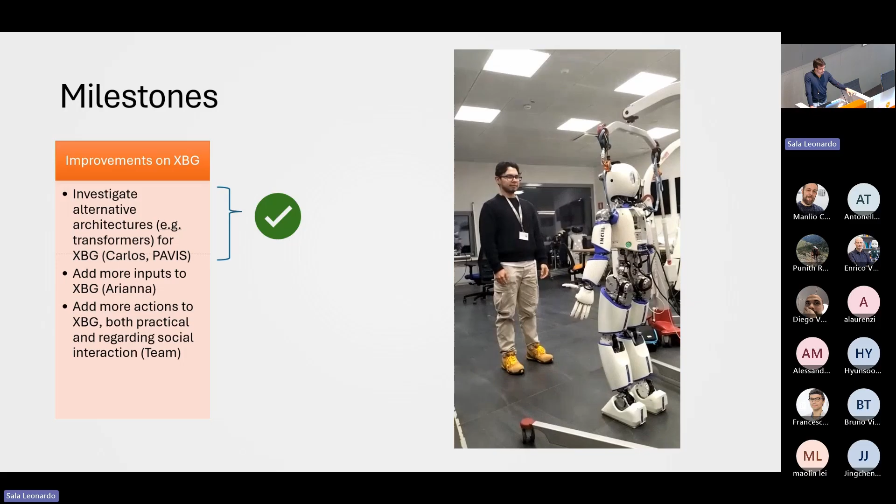Going straight into the milestones that we set last time, and going one square at a time. Starting from the first, we wanted to investigate alternative architectures for XBG, exploiting transformers. This indeed is the reminder of the video that Giuseppe showed before, with the robot using a transformer instead of the classical LSTM for the learning part. And we noticed that it was kind of able to match most of the capabilities of the old architecture, although it's still not perfect. For example, it was dropping the box.

The walking part was quite good, although it was able only to turn right for some reason. So it was pretty good in following Carlos while going right, while on left it was kind of refusing. It was just trying to go forward or right. But it was quite precise in following and stopping when needed. Interestingly, this was the first checkpoint of 5, and all the later ones were working worse. So it means that it's overfitting a lot, and there's also still a lot of space for improvement.

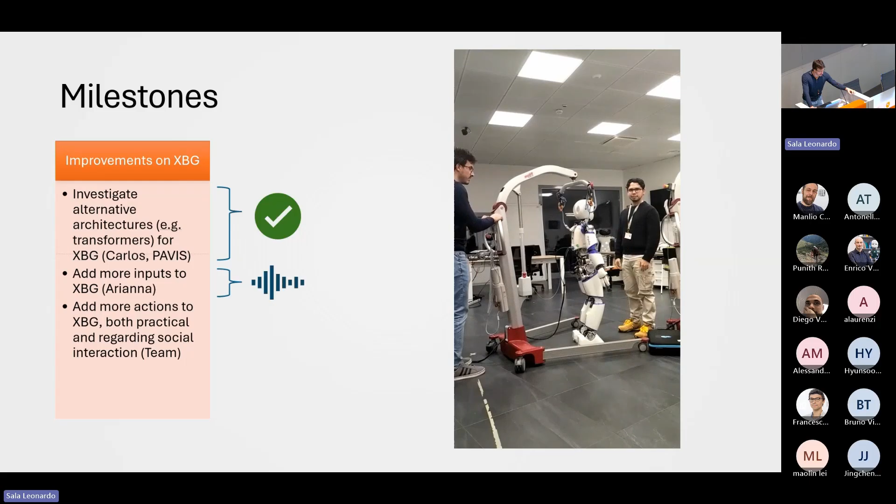Then we wanted to add more inputs to XBG, and this is an activity that we just restarted this week. And we wanted to add more actions to XBG, practical and social, regarding social interaction. We did have a first test on Tuesday, and we'll have another test on Thursday, but we are mostly there. Then we wanted to improve the user experience of the LLM part of the autonomy. This is something that we keep iterating, also considering the recent demos. And it's still ongoing. We are trying to conclude it during these weeks with Giovanni. And Giovanni also wrote a paper regarding the infrastructure of the LLM plus XBG, and we need to submit it, but it is ready to go.

For the third of 4 rectangles, we wanted to take more data for manipulation tasks, something that we did, and we are trying to exploit. We still haven't ported the results on the robot yet. Instead, we sort of postponed the investigation of language conditioning for manipulation tasks. It is something that we still have to properly delve into.

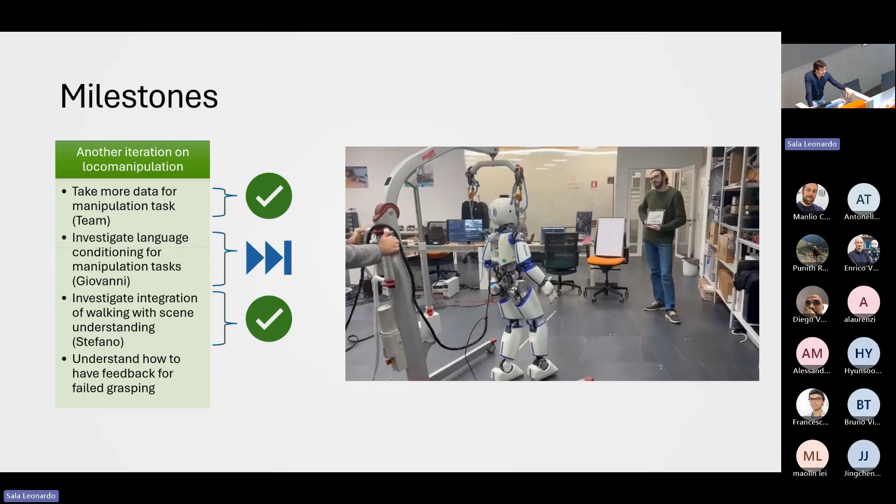Then we also investigated how to integrate walking with scene understanding. And this is the... Can you walk to the man with the tablet? This is the result. So there is Carlos speaking behind, but it's actually me typing on the keyboard because we are still integrating it. Here we're using Gemini.

Can you do what is written on the tablet? And the interesting part is that it's pretty smart. So in the first part, I was just telling it to reach the person with the tablet, and in the second part, I just typed to do what was written on the tablet. So it was able to recognize what was written, although it was flipped upside down. It was also able to walk. So I think this is quite impressive, and it opens up a lot of routes of exploration with this type of model, which just came out in December. But the integration with it has been quite straightforward, and we do hope to use it more in the coming weeks.

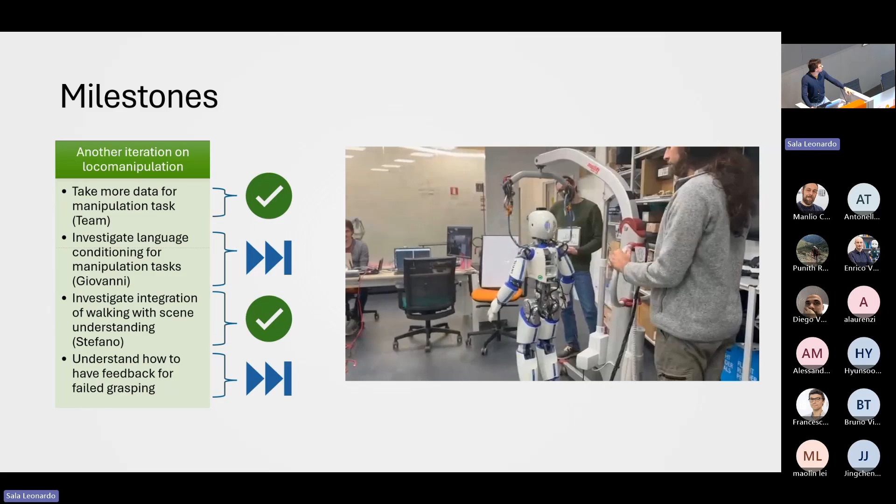Finally, we still have to understand how to have feedback from failed grasping, but also the advent of these new, more capable visual language models can help us in that. We also have architecture improvements, these are milestones with the PAVIS, with Tommaso and Matteo, and we are adding an evaluation block on the output of XBG and investigating continuous learning. It is something that we are actively working on, and this is important because, as I said before, these models tend to overfit a lot, and this will be a way of detecting when we are overfitting and avoiding forgetting past capabilities once we try to add new actions. So this will be fundamental.

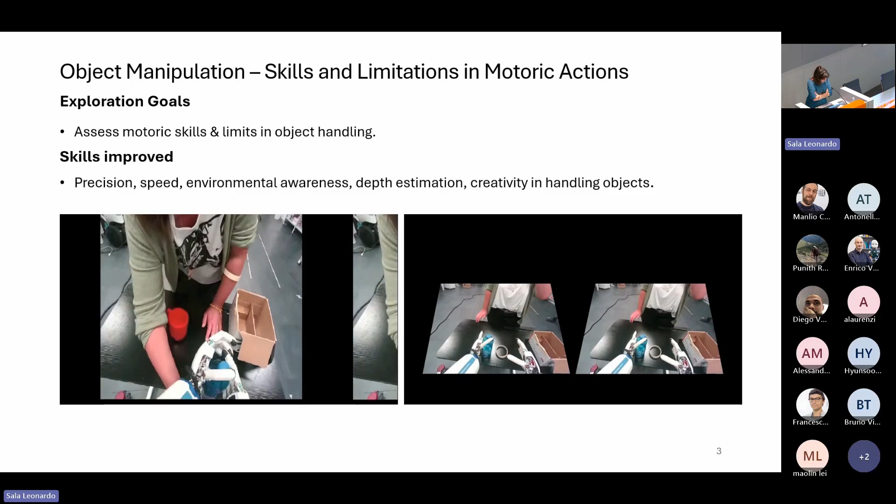Okay, let's dive into the first part, which addresses object manipulation. I was looking for the limits and the range of skills of the participants' motor actions in controlling the robot while they were doing object manipulations over an extended period of time. The manipulations consisted of training the placement of objects like a bottle, a box, or a cup, into various spots, so from here to there. And additionally, participants practiced actions like drawing, unfolding boxes, and throwing a stuffed toy.

The preliminary results show that controlling a humanoid robot requires the teleoperators to develop a new set of skills for adaptation to the robot's physical structure and motoric capabilities. As outcome, an increase in precision, in speed, and in overall body control, along with the unfolding of flexible and creative handling of the objects, was observable. This means the ability to lift, grasp, or reposition objects became more versatile over time. Furthermore, there was an improvement of handling the environmental space, the distances, and the depth estimation.

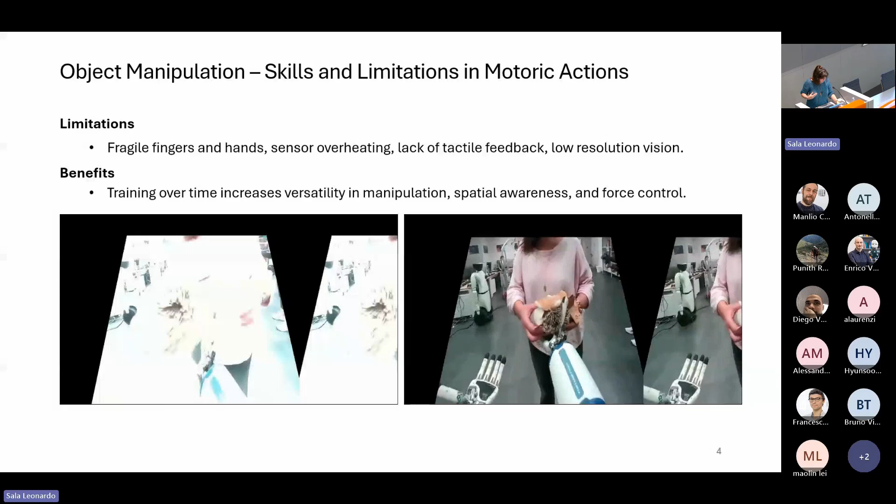But controlling the robot also showed some limitations. For example, the robot struggled with tasks requiring fine mechanical precision or force modulation. On the hardware side, limitations occurred with easily breakable, fragile hands, or the overheating of motors or sensors. Also, the low resolution of the headset caused tiredness and difficulties in depth estimation for the teleoperators. Furthermore, the users often demanded tactile feedback, which could serve as possible help for lifting, touching, and force control.

But overall, it turns out that it's beneficial to practice and train the manipulation of objects over an extended time, and that skills in grasping, estimation of depth, as well as the versatility of using the robot's body, improve significantly over time. For training, it seemed helpful to have a partner to interact with the robot, to help guide the robot's actions, and to help regulate the force control that prevents the robot from colliding with its own body or its surroundings.

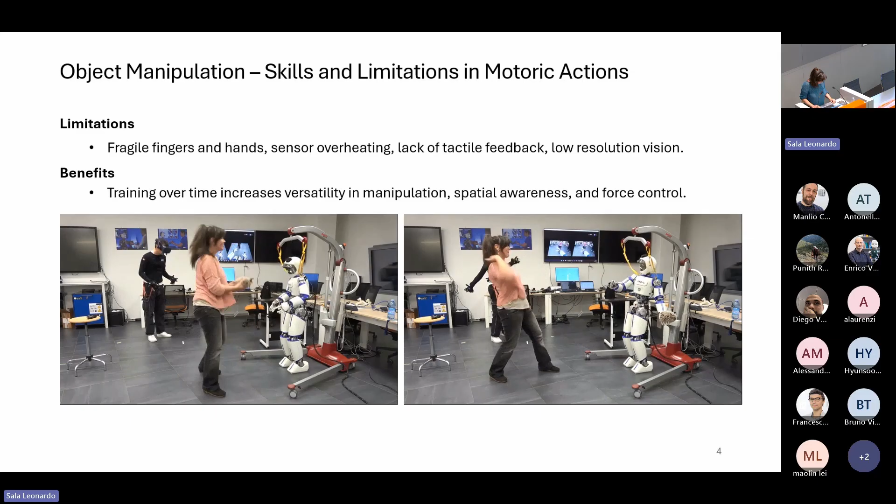Okay, let's move to the second part, which addresses the teleoperator's subjective experiences of selfhood or being present in the robot's body. But maybe we watch another throw. Could have been, yes, quite far.

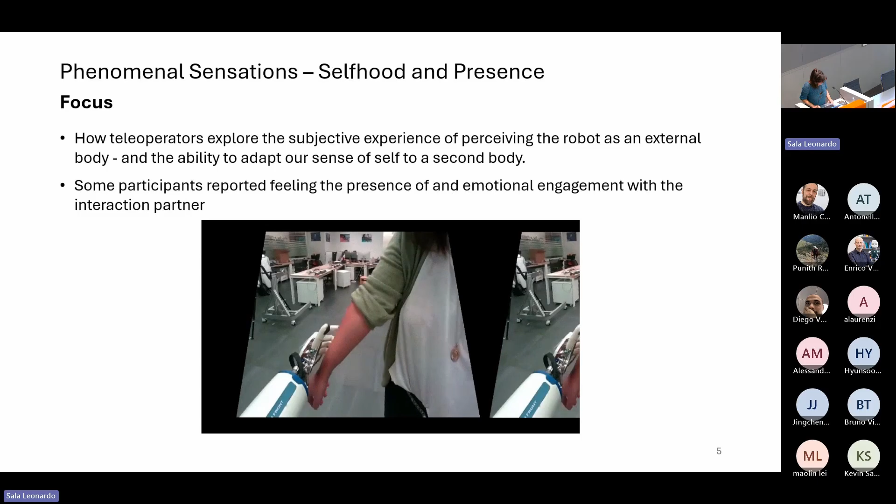During the experimental sessions, I constantly asked the participants while they were controlling the robot questions such as, where are you right now? Or can you tell me who you are right now? Or can you feel my presence? Can you feel my touch? The aim was to explore the subjective experience of perceiving the robot as an external body. Participants described a wide range of experiences. Some felt the robot became an extension of their own body, while others described it as replacing their original body. Some participants also reported feeling the presence of the interaction partner, or they described emotional engagement during human-robot interactions.

So there's a potential of teleoperation to create meaningful connections and agency in social contexts. These findings have an impact on applications of teleoperated robots where social interaction is key, such as fields like remote collaboration, therapy, and telepresence in hazardous environments. Another focus was to investigate how controlling a humanoid robot affects self-localization and body ownership. So we looked for ways to increase the convergence between the human body and the second robotic body.

Finally, we conducted 3 kinds of experiments that induced different body illusions for the teleoperators. First, we investigated full body or upper body illusions, of which you can say they are similar to the well-known rubber hand illusion. For this, we performed tasks in which we touched the upper body parts, both of the robot and the teleoperator, first synchronously, so at the same time, and then asynchronously with delayed touch. This resulted in participants experiencing a fusion of their sense of body ownership with the robot's body and perceptions.

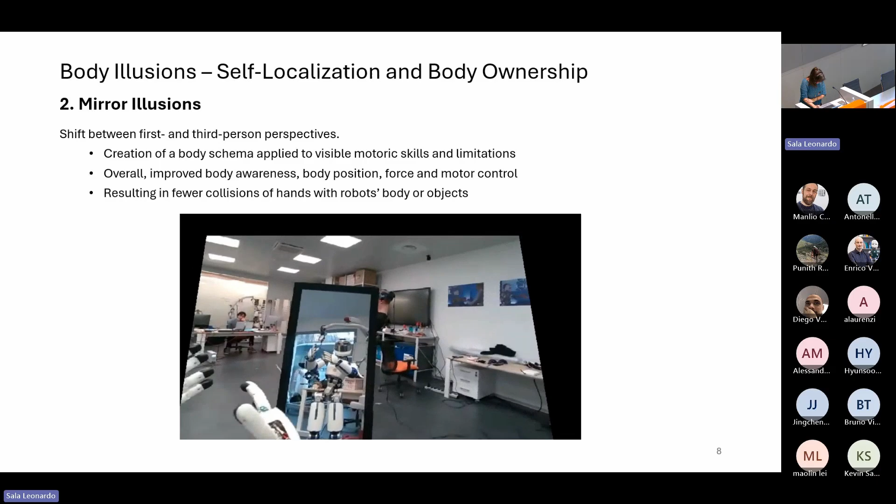And finally, we explored out-of-body experiences using a setup where participants stood opposite to the robot and saw themselves as teleoperators through the robot's perspective. This created a surreal sense of double agency as they simultaneously controlled the robot and observed their own body while doing so. Some participants described a dissociation of mind and body and a bilocated mind, disturbing certainties of self-location and self-identification between the robot and the controlling self.

So overall, the implications of this study need to be explored further, while the data suggests a phenomenon which is known as heautoscopy, an illusion in which the self appears to be bilocated in two places. These three illusion experiments revealed important insights into topics like self-localization, bodily ownership, and the plasticity of our sense of self, meaning that under specific circumstances, we are able to adapt to another body, even if it's an object, and perceive it as part of our own body schema.

These findings also have practical implications, such as influencing the design of more intuitive teleoperation systems that enable tactile feedback to a certain extent and allow a third-person perspective for self-regulation. The conditions are even helping to advance therapies for medical conditions such as phantom limb syndrome, for example, in the use of prosthetic limbs.

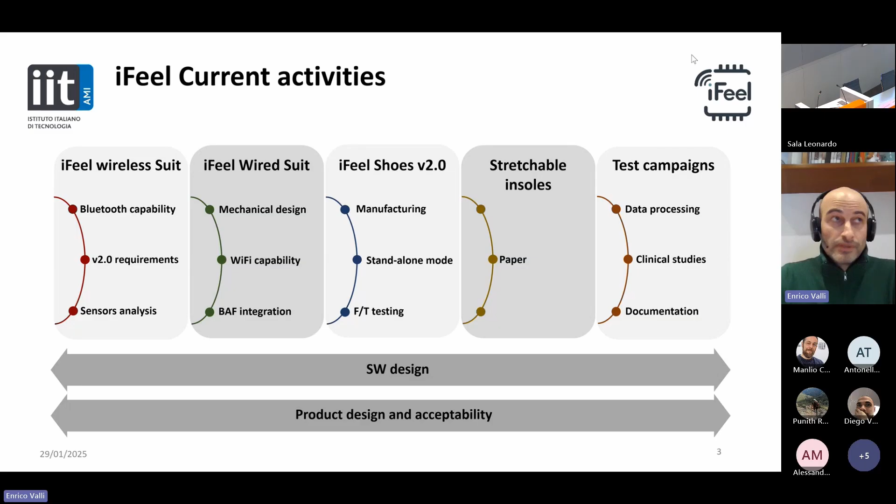Okay, wireless suit - we had a couple of upgrades. First, we created node version 1.1, extending the range of communication using an external antenna. We expect to receive the sensors mid-February, so in the next few weeks we should have them and make some tests. Then we are also working on adding Bluetooth capabilities - we wrote firmware on the current node and on the receiver to receive data via Bluetooth, and we also did performance analysis.

We also added some requirements, and we will start this research increment working on version 2.0 of the iFeel node. There are some changes from the previous one - mainly we are adding a range extender for the wireless communication, we want to add SD cards for parameter configuration, we use a new microcontroller, and we decided to move the battery recharging unit to an external board.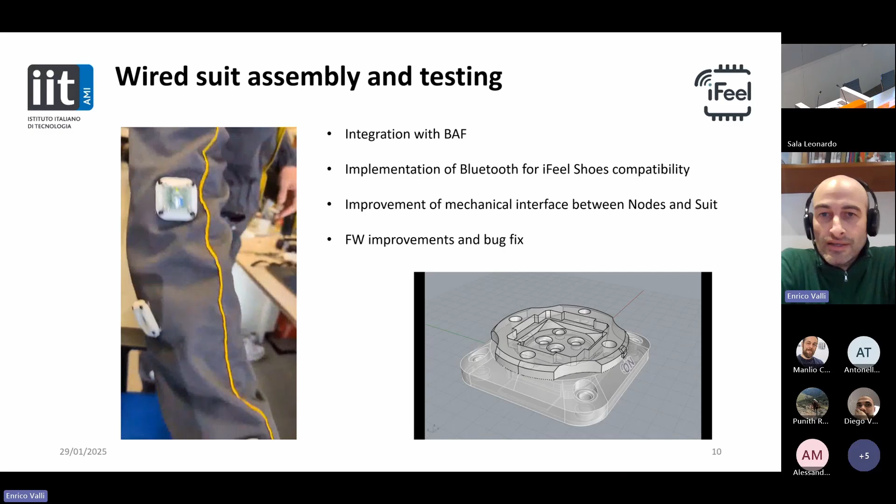Related to the wired suit, as you can see here from this video, the wired suit is fully integrated with BAF. Currently there is Bluetooth capability, but the shoes are not Bluetooth yet, so we use a little trick here to make the full estimation, kinematic and dynamic, working with BAF. The next research increment, the idea is to integrate the shoes and the suit with Bluetooth.

Then, in this video also here you see the way the mechanical design of the interface is done, and we made some improvement on this in order to make it more stable, changing some materials and making a little modification to the design.

Okay, related to the shoes, I don't want to spoil too much because then there will be the vertical from Marco. So just very quickly, I would like to tell you that we have been working in three different directions. The first one is to create this standalone mode. You will get more insight later on, but the idea is to avoid using the receiver, so you can use the shoes wherever you want and collect data internally in the SD card.

Then we perform a lot of tests with the output, with some report of the test for each FT sensor. And then we create also a tool that is capable of analyzing the FT sensors while this is embedded by an external company. You will get more insight later on in the vertical.

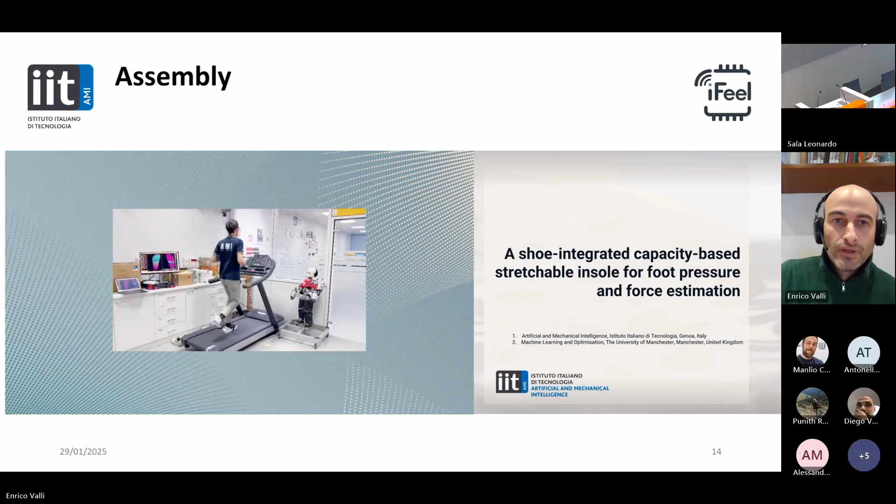Okay, so finally we have test campaigns. We have three test campaigns running. The first one is with AISM, the Italian Multiple Sclerosis Association. We perform a lot of data processing from the previous campaign, and we are defining now together with them the new protocol to be used based on the output of the previous campaign.

Then still another never-ending story is waiting for the payment of the Ministry of Health tax. So basically, we have to wait for this in order to be able to submit our documentation to the Ministry of Health to start this multi-center clinical trial with San Martino, the hospital in Genoa, and Villa Beretta. So the documentation is complete, everything is ready. We just miss this tax payment and the final grant from the ethical committee, which we should receive at the beginning of February.

Then we also defined a protocol with Campus Biomedico for a new acquisition campaign in Rome. And the idea is to start this campaign in April 2025.

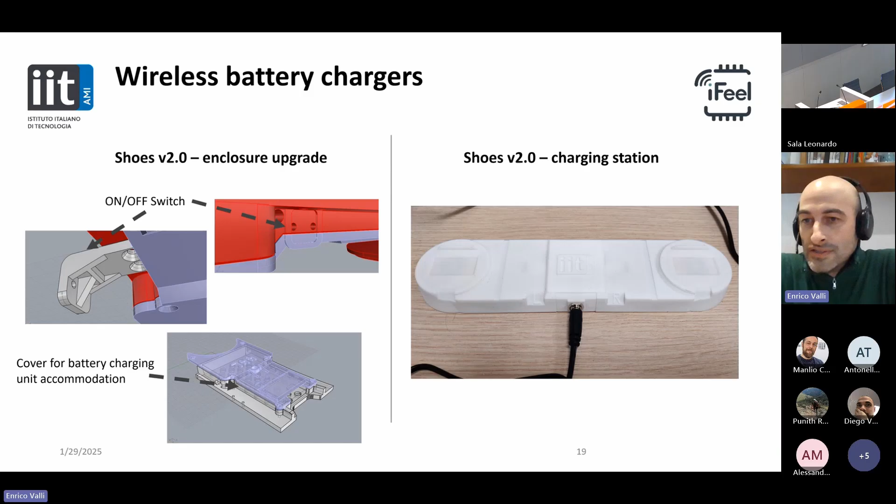Then we also worked on the wireless battery chargers for the shoes. As you can see here, we modified a little bit what we have on the shoes itself in order to make the charging of the battery easier. And then on the right side, you see here a new version of the battery charging station for the shoes.

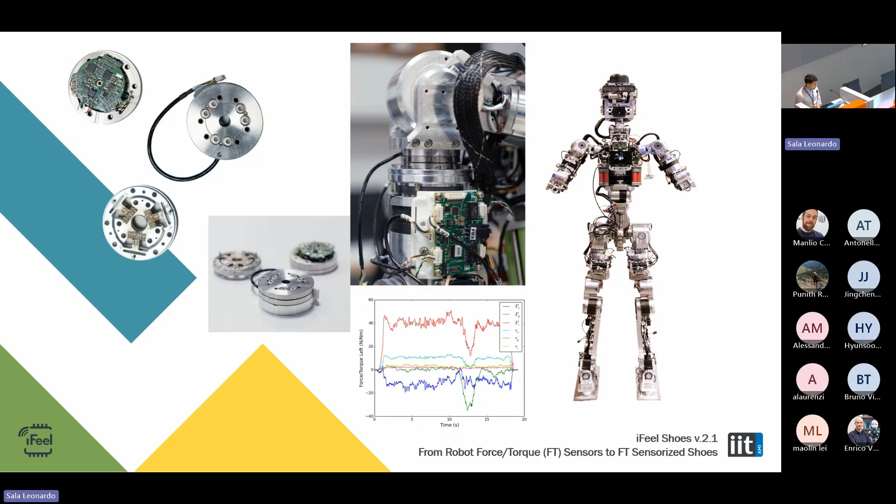The revolutionary concept was to apply the FT sensors to the human body. Initially designed for robotics, this ingenious technology has been refined in both design and electronics to be adapted for human use and embedded in smart shoes to become wearable.

This innovation has led to the development of a device capable of monitoring and analyzing the actions and forces involved in human motion, enabling the evaluation of key performance indicators in both industry and healthcare settings.

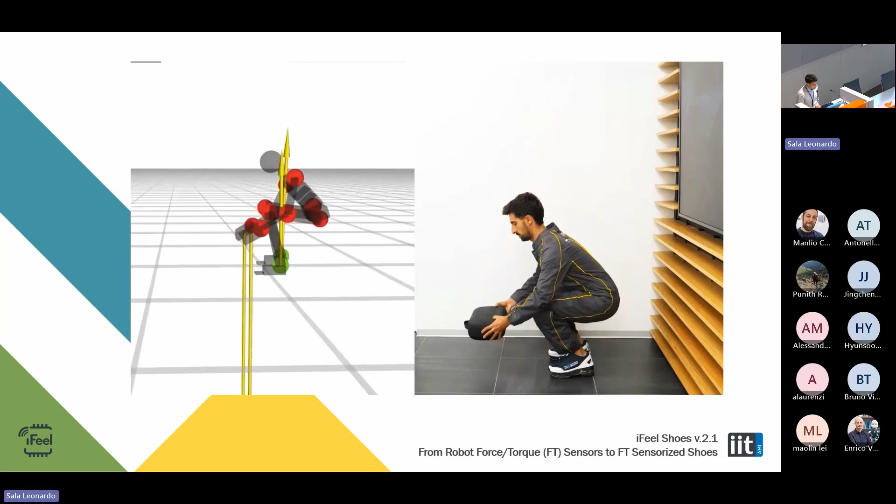In industrial workplaces, iFeel shoes can play a significant role in preventing spinal issues and reducing the risk of injuries, especially in environments where workers are subjected to hard and repetitive lifting tasks. Also, in medical applications, they can be fundamental for the prevention, diagnosis, and treatment of various musculoskeletal disorders.

The production of the iFeel shoes for series manufacturing was divided into two independent essential phases: the mechanical assembly and the electronic component integration.

The mechanical assembly is where the shoe structure is created for robustness and durability. This stage required the help of our skilled craftsmen - thanks to Gianluca for his valuable patience in using the glue to attach the Velcro on top of the nylon plate, and to Alex, who did a great job handling the design of the new custom mechanics and also supported me in organizing the materials into packages and bags. Thank you, guys.

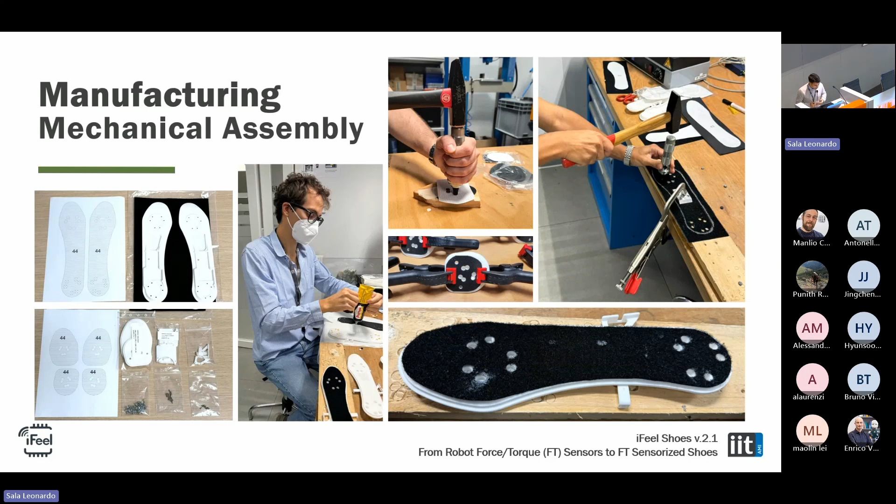We integrated the sensors and components into the shoe in the electronic assembly phase. This part of the process required high precision, and I had to rely on my unexpected soldering skills to ensure all connections. I had to care about all the sizes of cable and materials introduced inside the housing of the electronics, and use a torque wrench to tighten the screws with a specific force of 1 Newton meter, for example. So, a lot of detail.

Thanks to this attention to detail, the electronic components fit without problems into the shoe, bringing the technology to life. As a result of this process, we successfully produced 3 pairs of different sizes of iFeel shoes, which have already been used in demonstrations to showcase their functionality and design.

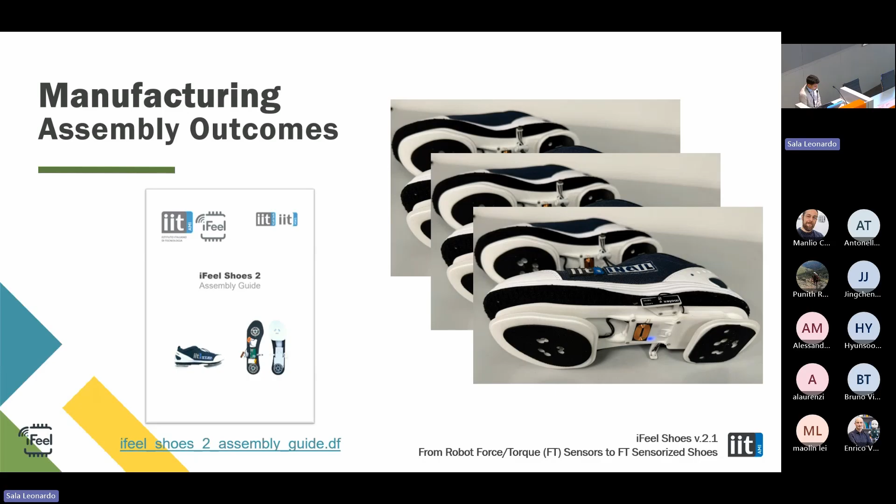Additionally, we created a detailed assembly guide documenting every step of the process. This comprehensive documentation can be used for future productions, ensuring consistency and high quality standards in every pair that we produce.

Before the final assembly, all the electronic components were tested to ensure functionality and data quality. I tested a batch of 25 iFeel shoes' 2 printed circuit boards, verifying the proper operation of the microcontroller, the correct programming of the flash memory, the functionality of all the MEMS on the PCB such as the IMU module, the pressure sensors, the radio, the I2C bus, and also the read-write access to the SD card memory.

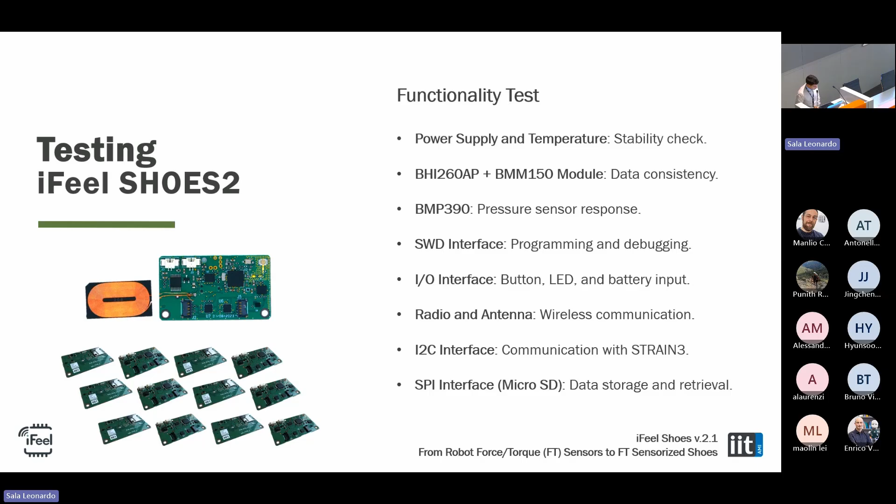I tested in total 50 iFeel Strain 3 electronic boards to check the functionality of all components and 20 assembled sensors to ensure data quality. So a lot of tests, and this important number highlighted that we needed to develop a device to automate this process.

So I developed a testing device for the FT sensor system that automates functionality and data quality tests with a simple touch. It provides feedback through an RGB LED: a red blink for a functional test failure, a purple blink for violation of user-defined data stability limits, and a green blink for successful tests.

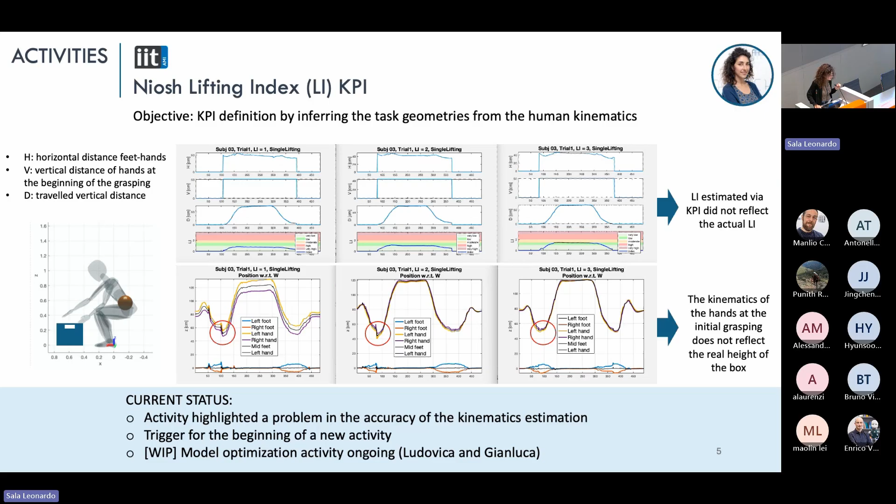This was the trigger for another activity that Gianluca and Ludovica started on model optimization, because we thought that if the results are not good, it could be a problem related to the model, the sensors, or a combination of the two. But we started investigating the model for the time being. So we acquired a new dataset with a subject in the lab. We performed simple tasks: an N pose and T pose. This was the first task. The second was torso bending with no DOF motion.

I mean, try to mimic a lifting task without using the joint of the torso. So something very fixed, with the torso fixed. And the other task was with using all the joints, all the DOFs in the torso.

Actually, what Gianluca and Ludovica did was to use a different model, just to understand if the model was the previous problem. Because the left-hand side model you see is the model that we obtained via the human model generator tool. And this model is built by providing a subset of measurements of the human, mainly the height of the human, and the model is created via the anthropometry.

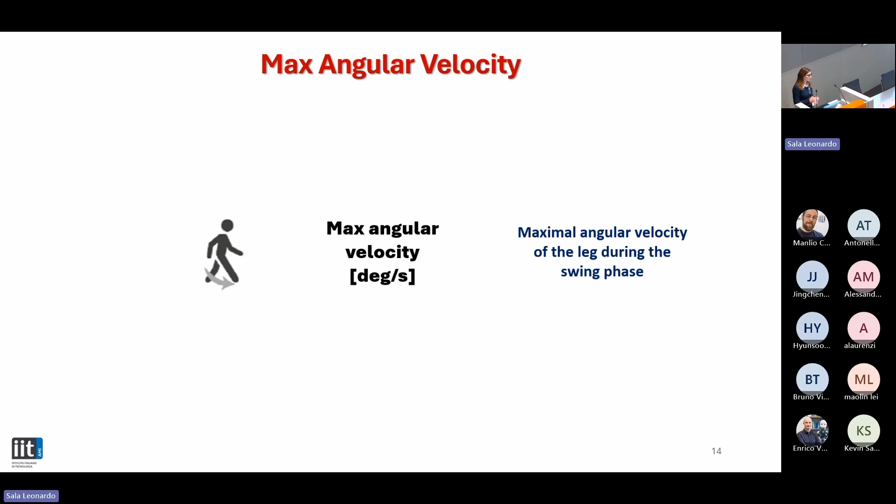The first one is the cadence, the number of steps that a person can perform in 1 minute. The second one is the cycle duration, the time that passes between one foot strike and the subsequent one of the same foot. Then there is the stride length, the distance between successive points of initial contact of the same foot. The next one is the max angular velocity, the maximal angular velocity of the left or right leg during the swing phase.

We can pass to the swing width, defined as the ratio between the lateral displacement of the foot during the swing and the stride length. The next one is the path length, defined as the 3D distance traveled by the foot during the swing compared to the stride length. The last ones are the stance phase and the swing phase, respectively the entire time that the foot is in contact with the ground and the time where the foot is in the air.

Let's now pass to the NIOSH lifting KPI parameters. The NIOSH lifting equation defines the recommended weight limit. This parameter is a recommendation of the heaviest load that a healthy worker can lift without increasing the risk of developing low back pain. In this equation, there are many factors.

The first one is the load constant, that is the maximum recommended load weight that can be lifted under ideal conditions. Then there are the horizontal, the vertical, and the distance factors that depend on the geometry of the lifting task. The frequency factor depends on the time between lifts, or the frequency of the lifting.

Then there is the asymmetric factor that depends on the angle between the load and the body position. And the last one is the coupling factor that defines the quality of the grasp. That could be good, fair, or poor, and it depends on the body position.

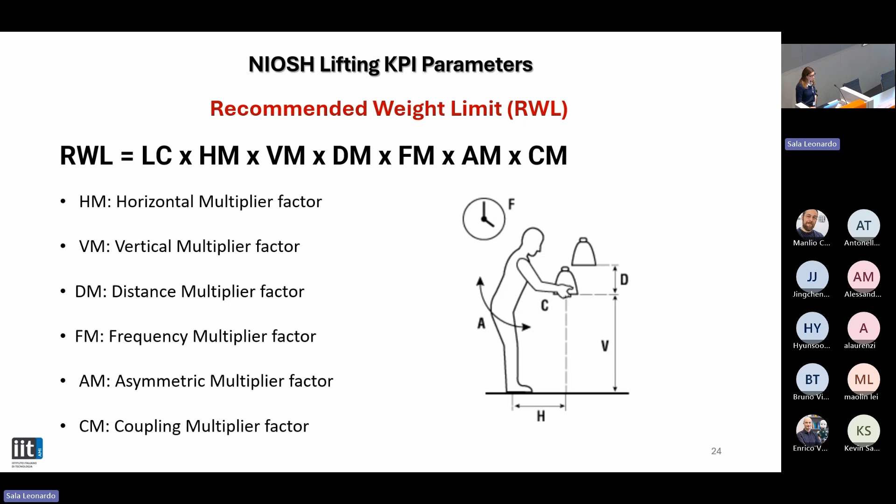Directly from the recommended weight limit, the lifting index can be derived by using the weight of the load that could be lifted. The lifting index in particular identifies how dangerous the lifting task that is performed is in terms of potential risk of injuries.

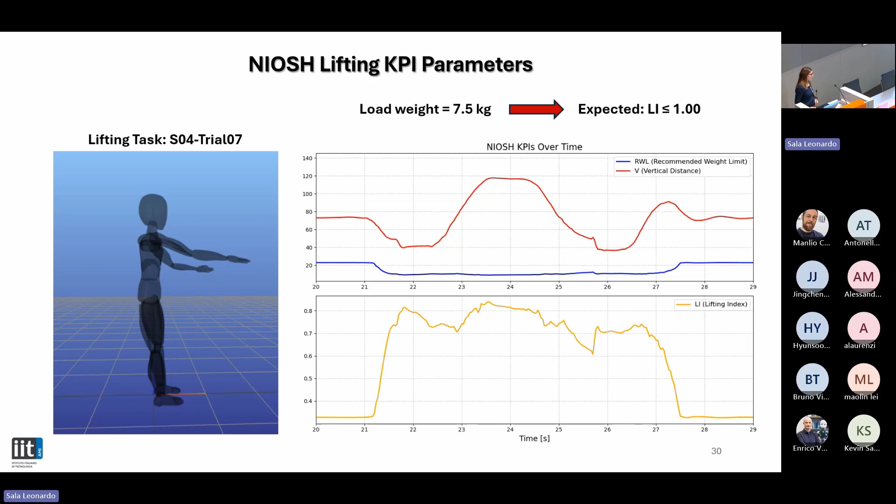Let's now pass to the conclusions. We can say that now all the KPIs that were previously implemented in MATLAB are available in Python, and moreover, the NIOSH KPIs have also been added. In particular, the KPI calculation has been converted into a Python library, which will be integrated into BAF.

Lastly, the project scripts section creates a command line interface linking the BAF KPI analyzer script with the main function of the BAF KPI main module. This modification allows the user to run the KPI analysis directly from a command line.

And this change makes the code much more flexible and usable, because a key aspect of this transformation is that the code is more generic and no longer limited to a single use case or a specific data set. In fact, it can be easily adapted to any needs, and anyone can integrate the KPI calculation into their own workflow. Thank you for your attention.